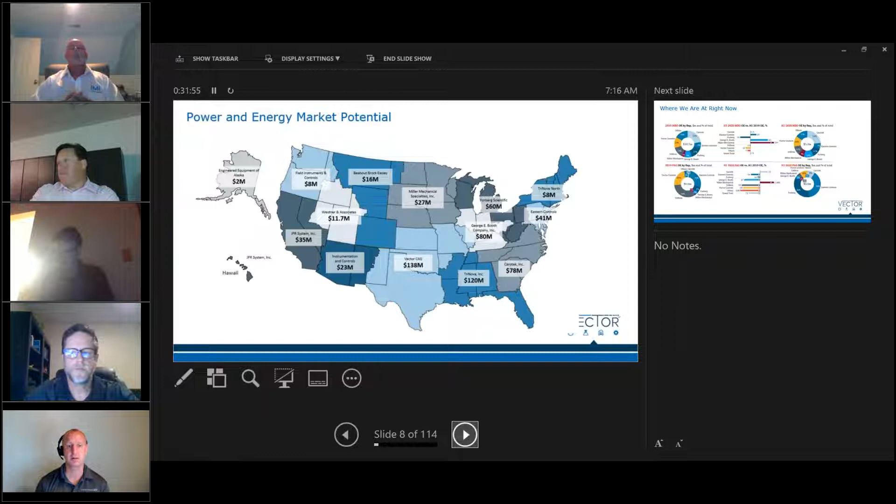Boyd, yeah, the question came up that your slide here is just showing power and energy markets, right? Yes, this is only power and energy and only instrumentation. Yep. Thank you. Yep.

And then if you look at how we've been performing this year: if you look at 2020, our MRO business overall in the US has actually slightly grown. We're up 3% in MRO, which is pretty impressive right now, given the current state of the economy and everything. So there is opportunity there. We still are winning MRO business, and that's kind of the hot hand right now in Endress+Hauser, one of the hot hands.

If you look at the project business, even though all of these gas turbine plants are still going on, we're actually kind of in a lull. We're bidding a lot right now, and in the beginning of 2021, those orders are going to start coming through just because of the construction cycle. And the industrial steam kind of follows industrial output, so that part of the project business is down this year. That's leading to being 70% down in projects this year.

So that's really where we struggle. There's plenty of opportunity there, especially on the generation side, probably more so than the industrial steam. The other reason this is down is because the turnarounds have really taken a hit. There's been a lot of delayed maintenance and delayed turnarounds. So we're looking at 2021 as being a really big turnaround year. That's one thing to focus on next year: when we talk to utilities, look at their turnaround schedule. They're going to be doing a lot of maintenance and need a lot of work. So there's going to be a lot of service opportunity out there in second half 2020 and 2021.

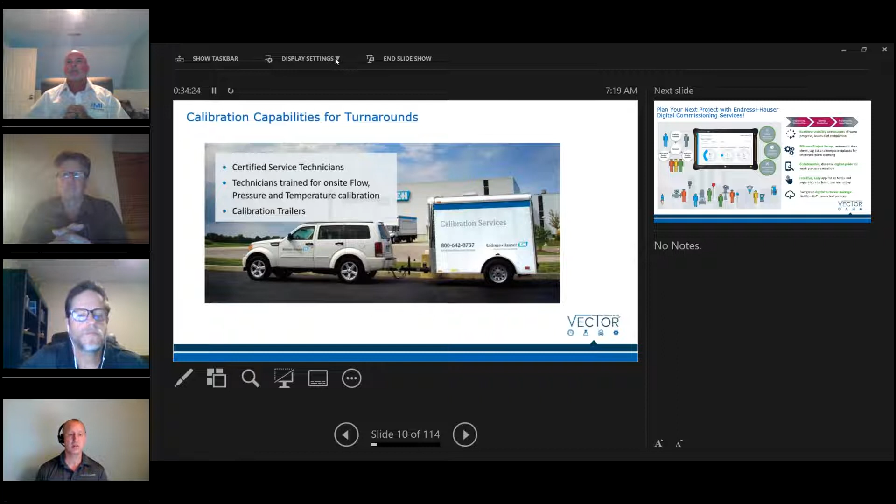Also our calibration trailers, especially with flow. If you look at the natural gas flow into the turbine, for instance, that's one thing they have to do a lot during turnarounds. Being able to help with that and do a flow calibration on site really makes that calibration go quicker.

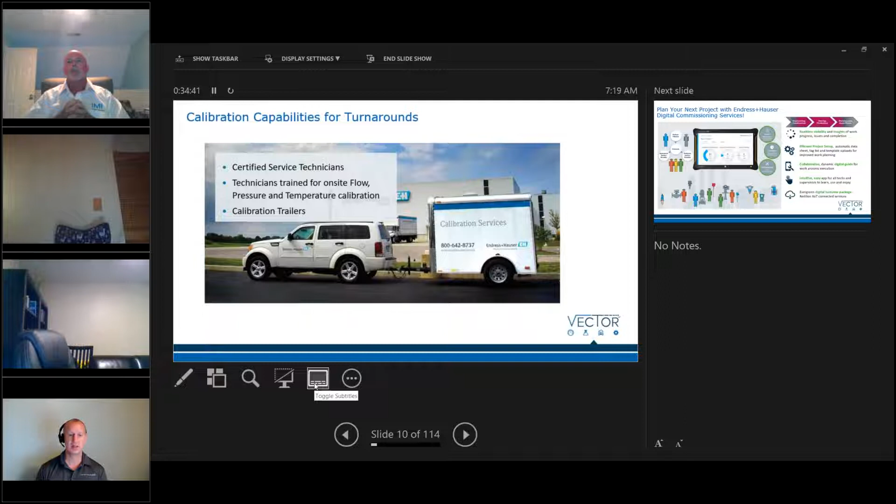Go on the next slide. Looks like we're in the middle of technical difficulties. Maybe, should I keep going? All right, I'm gonna keep going. Hopefully you guys can hear me.

I think most of you are familiar with our SMT-70. This does a couple of great things for our end users as we talk to EPCs and NG plant operators and utility operators. What they lack right now a lot of times is a single place where they can go look at all their instrumentation, with all the DTMs and drivers in one machine.

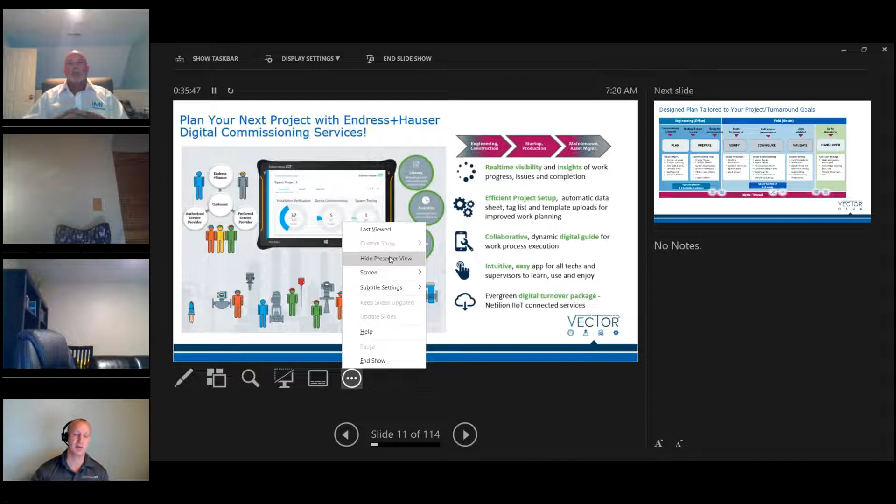A lot of utilities and power generation stations are still doing their calibration with pencil and paper. They'll send an army of people out there to calibrate, do it all by pencil and paper, go back in, and upload that to a computer.

So this leads to a couple of problems. Number one, there's transcription errors as they write it down and then transcribe it over to computers, tracking systems, and into their EPC or maintenance tracking system. It takes a while, and there's a lot of opportunity for error there.

And it's also hard for them to track where they are on the outage schedule. So they don't have that real-time update. They have like an end-of-day update, or maybe even every couple of days, an update of exactly where they are.

So that's one thing that the SMT-70 install base audits can really help them out with, along with the increased manpower of having people come in and do calibrations, because often they don't have the manpower to do that. That's one place Vector and Endress+Hauser can help.

Can we ask Boyd a question while you're waiting? Bring it. Yes, please.

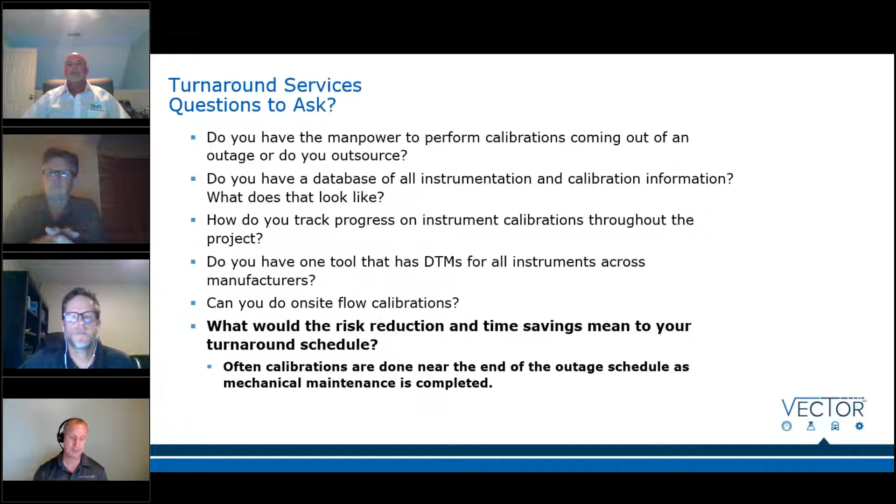So that's something that really helps end users, especially coming up next year where there's going to be such a heavy turnaround schedule. This is something that could really help people out. And really what the people we've talked to are interested in is being able to come in with turnaround schedule help. So bring in an SMT70, put in an installed base audit, do all the instrumentation, and then at the end of that outage, we turn over the SMT70 with all of that inside the machine. So that helps them not only with the current outage, but with all outages going forward and gives them a better instrumentation calibration schedule or program. So really big for customers.

The other thing to look at is heartbeat verification. Of course, we're the only people in the industry that can do this. As we all know, there are 3 pillars to heartbeat: diagnostics, verification, and monitoring. I'll focus on verification for today. The good thing about our verification, or where this helps our end users, is with a couple of very important calibrations. Think of the flow calibration for natural gas going into a turbine and the flow calibration for the stack that are both needed for regulatory purposes. If you look at natural gas flow in, if they have to take that flow out of the system, put it on a flow skid and calibrate it, I think they're moving to every 6 months. The EPA wants them to do that. So if you can extend that through heartbeat verification, that's a huge win.

It keeps their plant up and running longer. They don't have to bring it down just to do that, or sometimes they have multiple strings. But even if they have multiple parallel instrumentation, that's a big point of leakage. So the less times you can break that seal, the less times you go through the mess of bringing that out of the system.

That's a huge win for them, and that's something people are very keen on doing. So if they can go with a heartbeat verification for one of the cycles and extend that to a year rather than every 6 months, that's a big win for our end users. And that's something, like I said, only we can do. That's a highly differentiated solution.

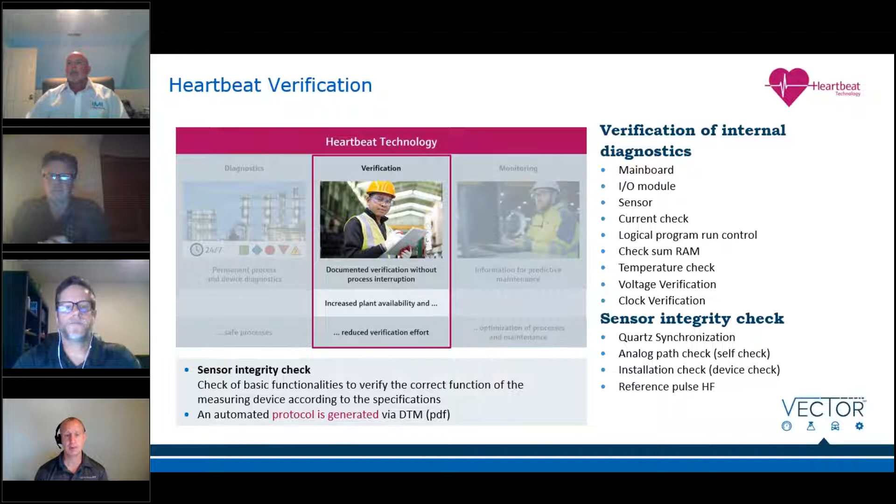All right, so pretty easy questions there. If you just get them talking about the process of calibrating the inlet fuel flow to their gas turbine or their boiler, anything they can do to extend that calibration cycle is going to be a big win for them. That's money directly in their pocket.

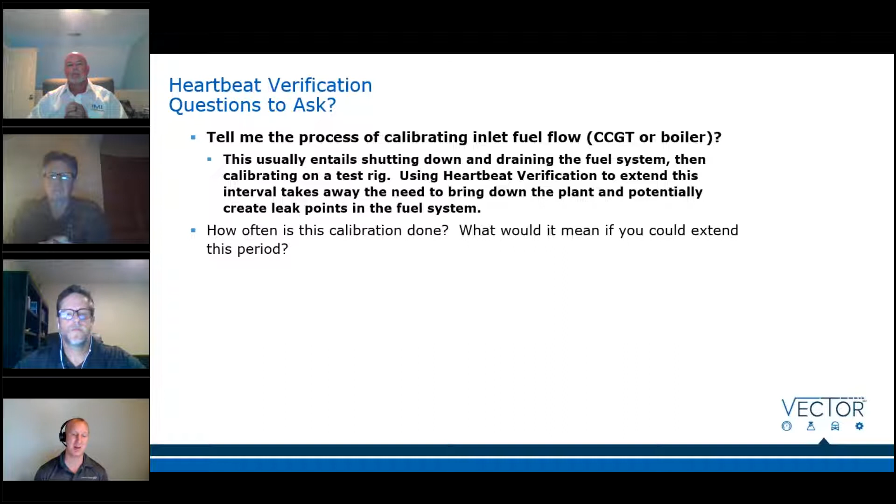But then if you talk about how the calibration is done, what would it mean if you could extend that period? Those are the big talking points—what if you could leave it in there and do a heartbeat verification instead of a full calibration, bringing it out and extending that cycle.

All right, so the next one to talk about is gas phase compensation in the steam cycle and level measurement on the pressure vessels. If you look at the big places for this in the steam cycle—the boiler drums, the high pressure heater string, and the feed water tank—we'll just kind of focus on the boiler drums.

The traditional way to do this is through DP. I talked to a lot of utilities, especially combined cycle plants that were built with DP level control. The problem is if your level goes too high, you'll end up getting vapor down your main steam line. You get it into your turbine, which leads to really bad things—as you can imagine, those steam droplets hitting a turbine rotating at 10,000 RPM.

If you go too low, then you can uncover steam tubes. If you uncover steam tubes, then you have real problems in your boiler—either your boiler or your feed water heaters inside of your HRSG, your heat recovery steam generator.

The problem is a lot of people don't know whether they have a wet leg or dry leg in your DP cell. If you don't refill your wet leg as you come up to pressure, you'll basically have flashing of that steam leg. Your level indication will become erratic, and you'll have automatic plant trips, or it's just a scary situation—just not being able to see what your steam drum level is as you come up. That's something a lot of end users have problems with.

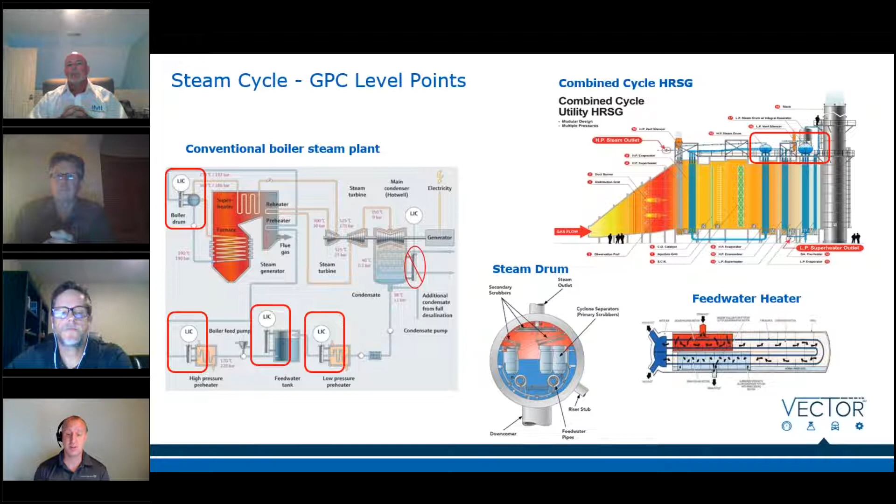However, if you go to the next slide, that does introduce a new problem: radar speed is changed by the density of the steam. So if you have dynamic gas phase compensation, you can actually compensate for that. You have a reference rod within the transmitter or detector, which will detect that known length. It'll see how long it takes the radar to travel that distance, and it'll automatically compensate the level for that.

The problem is you really have issues at startup and shutdown. As you move through that steam table, going from atmospheric pressure up to 2,000 or 3,000 psi, that is constantly changing. So what you need is dynamic gas phase compensation—during startup and shutdown is when you have problems. So it gets rid of all the problems with DP cell or DP level, and it gets rid of the problems with static gas phase compensation.

Normally what people do is wrap this all up into one bridle that's got a magnetic level indicator with gas phase compensation. Anywhere you have a sight glass, you'll be able to have flippers, so you can easily see what the level is visually. You have an independent way to see both remotely and locally what the level is, meeting all the ASME guidelines for your gas phase or level compensation on your pressure vessels, which is big.

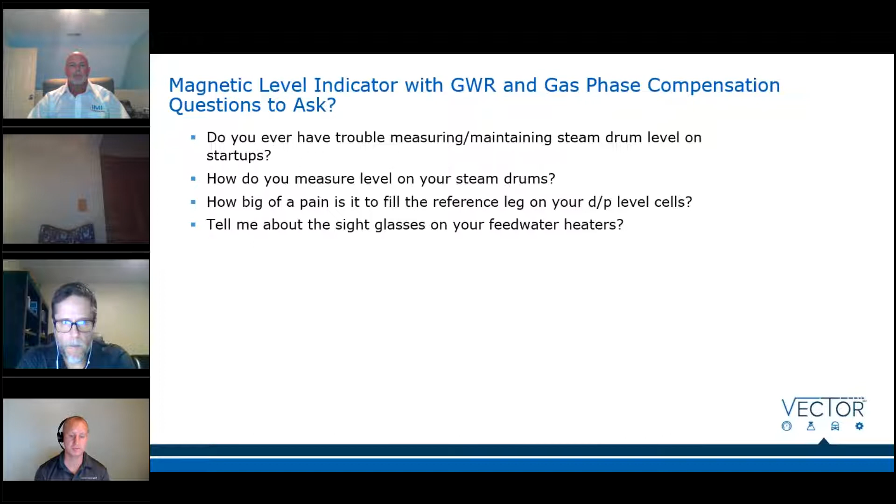And then of course the sight glasses—once the sight glass gets old, you can't see through it after the first year and a half. You get a bunch of crud buildup in there, and the magnetic level indicator solves that problem for them.

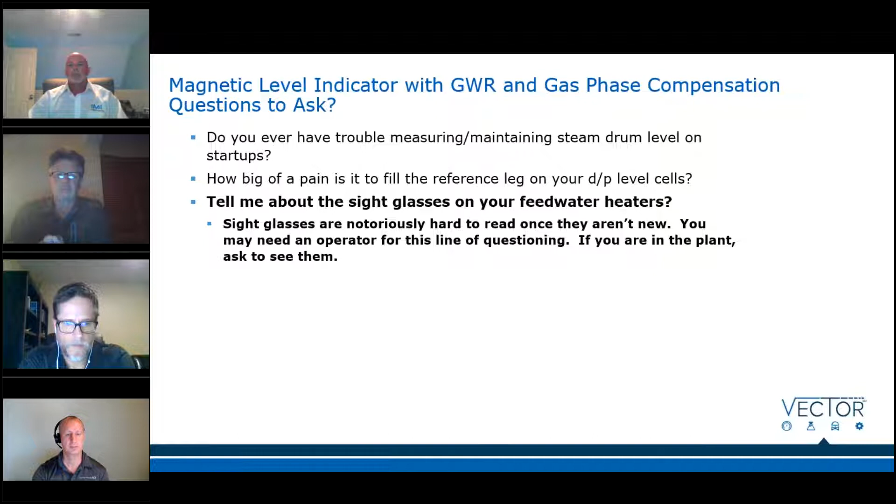So the next thing to talk about is fuel flow to the boiler or gas turbine. Depending on what type of boiler or turbine we have, of course, a full array of flow measurement going into that. We talked about heartbeat technology and why that's important to this measurement.

The other thing to talk about is onboard gas engines, which is really big if you're running a turbine or a boiler, especially if you're using some sort of flex fuel where the combination of gases within that are changing.

If you're running natural gas, Coriolis is a really great measurement for that. If you're running a boiler, you might be using something as low as the i300 series, or something a lot bigger if you're running a full-blown gas turbine, like that 500 megawatt turbine. But being able to have an inline viscosity measurement, Coriolis flow, and detecting water in the oil, and of course integrated gas engine, which we'll get to in a second, are really big there.

If you're running a boiler and, of course, biogas for instance, being able to use the Prosonic flow and getting real-time methane fraction analysis is really big—that way they know how much methane is present. Then the thermal mass flow meter for either smaller boilers is a big one too.

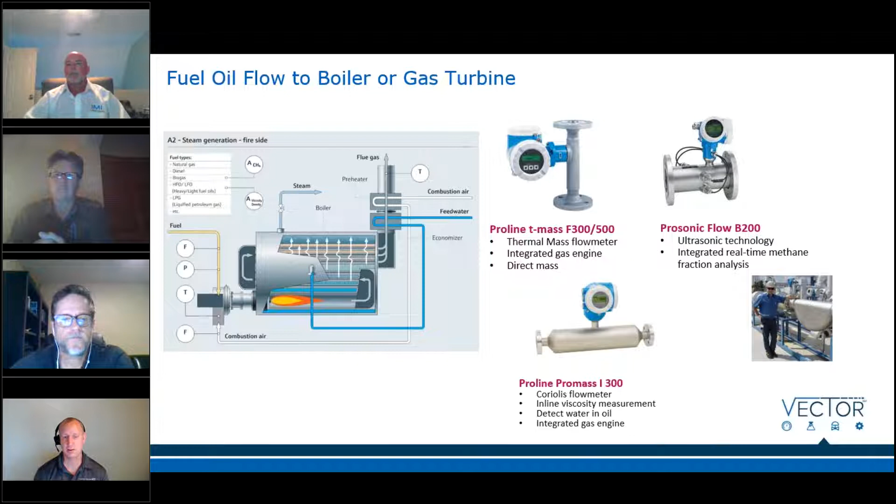Of course, onboard gas engines allow you to load in what the mixture is of your gas, and there are 20 gases available. So when we say natural gas, that's actually a mix of all sorts of gases. If you know all those gases, you put them into the standard gas engine, and it'll spit out the gas conditions. It'll look at what the densities are and adjust for that, giving you an accurate measurement of all the gas mixtures, the BTU content, and better control of your boiler or gas turbine engine.

It's also a good way to back up what you're being charged by whoever you're buying the gas from. A lot of people are using that to check their bill and make sure they're getting what they're paying for.

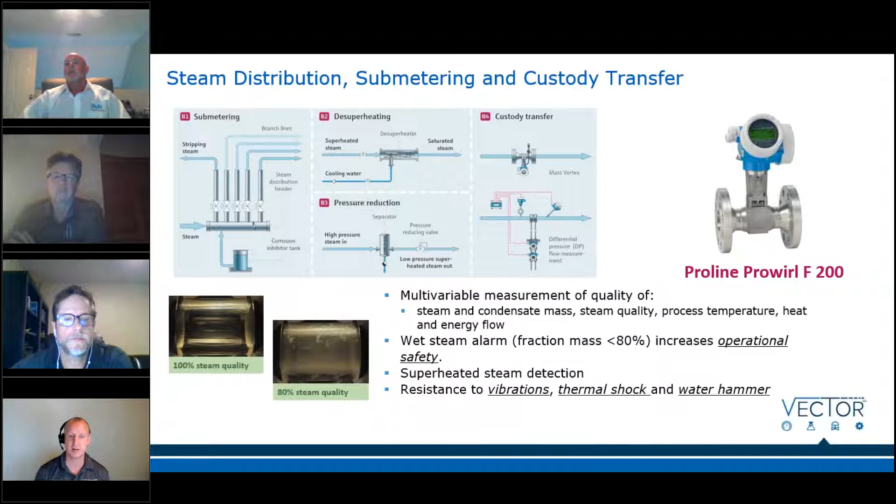It'll let you know if you're actually having enough cooling water to get your superheated steam down to saturated steam conditions. So it can measure how much subcooling you have, and how much superheating you have. In some places in the plant you don't want superheated steam, so it can give you an alarm to make sure your desuperheater is operating correctly, and let you know if you have superheated steam where you don't want it.

So both of these put together: if you have a better way to measure the BTUs in your fuel, and a better way to measure the steam quality and energy of your steam, you put those together, throw in a memograph advanced data manager, and you can do a much better job of measuring the boiler efficiency.

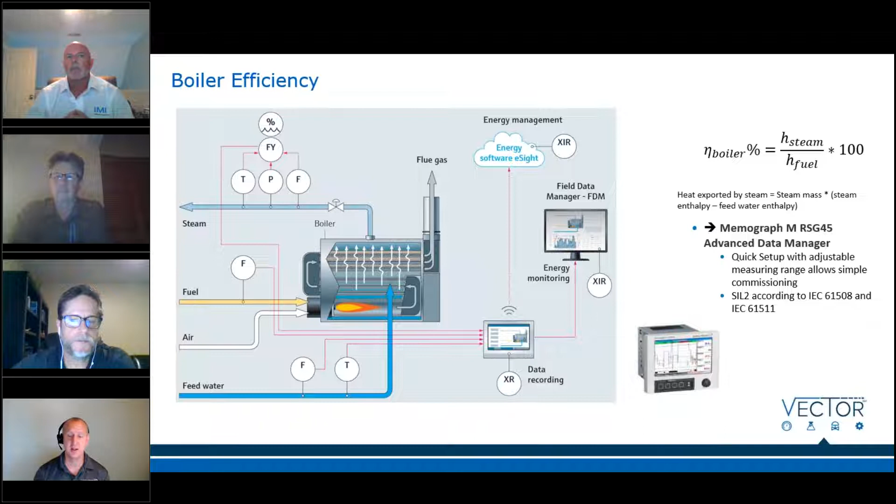Of your steam plant, either boiler efficiency, or you can actually measure the efficiency of any of your plant equipment. If you've got heat exchangers, anything you want that you've been doing a mass balance on, you can now do an energy balance on, so you can know how efficient your equipment is operating.

You can better plan your outage schedules. You know when to clean heat exchangers, when to bring them offline, when to go to standby, when to backflush. You can just have more insight into how your plant's operating. Really, the enabler for that is the wet steam measurement and the fuel flow measurement.

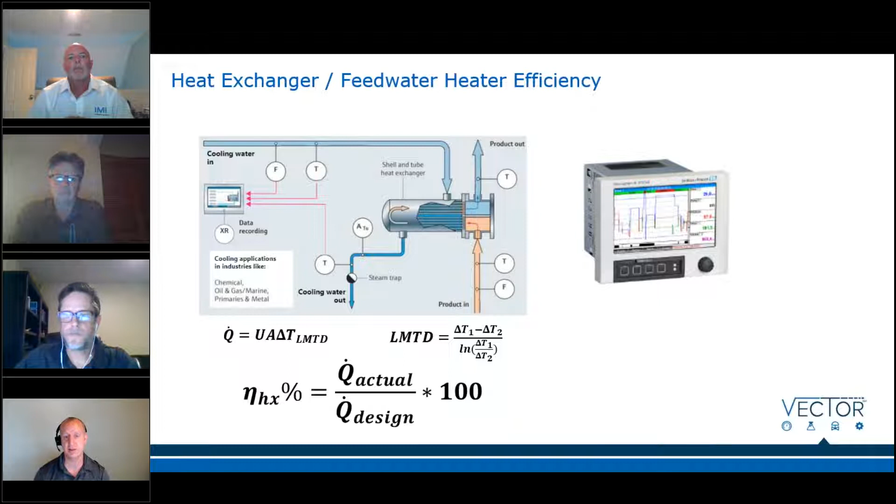So questions to ask: when you look at the components of your natural gas, especially if you have a plant that's dual fuel, using diesel fuel or natural gas or biogas, how do you switch off? How do you know what the fuel composition is going to your boiler, and how do you know what the efficiency of your boiler is?

Same thing with a heat exchanger and feed water heaters. How do you decide when to clean a heat exchanger, when to do maintenance on it? When you come into an outage with all this thermal equipment in your plant, how do you decide what maintenance to do on what? This can really give insight on when to do that. And of course, how do you know when your steam quality is too low?

This is a big problem, not so much in generation, but especially in industrial boilers. Knowing when your steam quality drops is a big deal in cogen plants too, because people just assume it's 100% vapor, but it's almost never 100%. As soon as it leaves the boiler, it starts condensing as it goes down the pipe. So knowing the actual vapor fraction is a big deal.

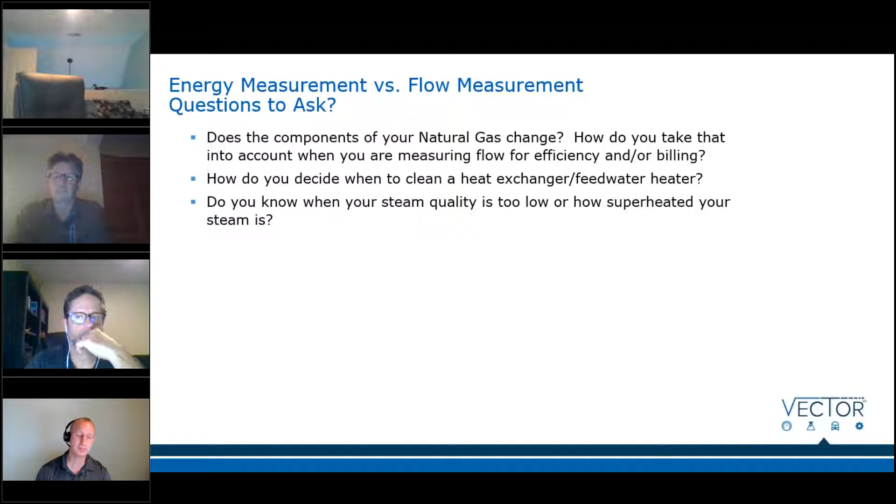I think we covered all this. The last one here is ProMag, one of our newest products that came out, the full bore ProMag electromagnetic fuel flow meter.

Sorry, just got a pop up there. You guys can still hear me, right?

Full bore fuel flow is a big one, especially as a lot of plants are upgrading, going from coal plants to gas turbine plants, with a lot of overhauls and work being done inside power plants right now. One thing people are looking for is upgrading instrumentation in general, and flow is a really hard one. If you're looking at feed flow, or flow to your main condenser or condensate system, being able to put in a new mag meter without worrying about straight run piping is really big. That allows them to upgrade their instrumentation and technology without having to re-engineer all of their pipes within the system.

That's pretty easy, just a conversation about where they're looking at upgrading their plant. I think you guys know what mag meters are and straight run piping, so I don't think that needs much more explanation.

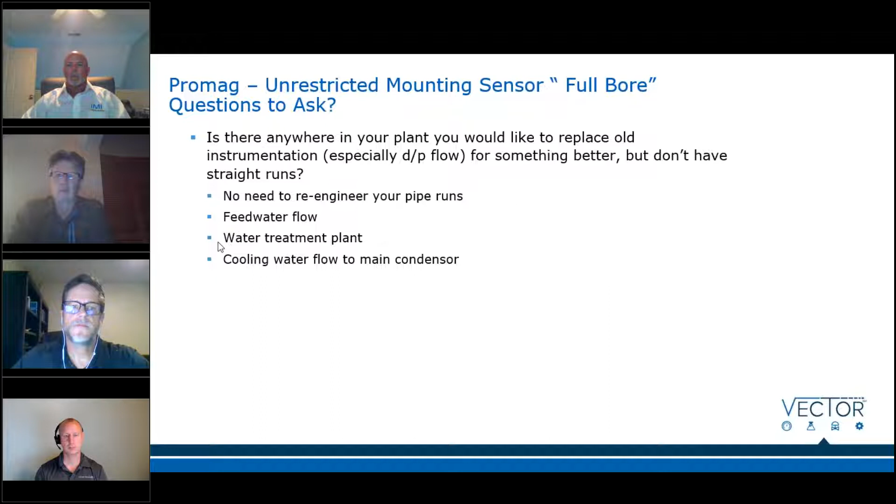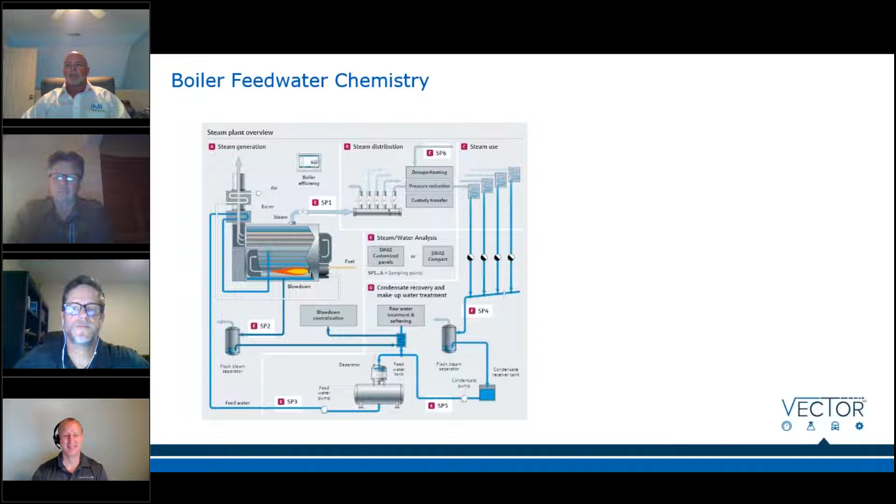Wait, sorry, Nick, we may need you again. Oh there we go, don't touch anything else. All right Boyd, back to you buddy. Are we in the right spot or do we need advancement? No, we're good, actually advance one more.

There we go. So if you look at all of the sample stream, we have a very robust analytical portfolio. Unfortunately, we don't do a ton of business in analytical. I'm not sure why, we have everything that our end users need for their feed water chemistry. I think it's mostly honestly an effort thing, we haven't tried to sell analytical that much.

But a good time to get in there right now is with our silica analyzer. It's really better than the competition, quite honestly. That's where we have good talking points and where we can actually win business. So I think the right way to do that is lead with silica, and sodium to a lesser degree, but silica, and then try to dovetail everything behind that.

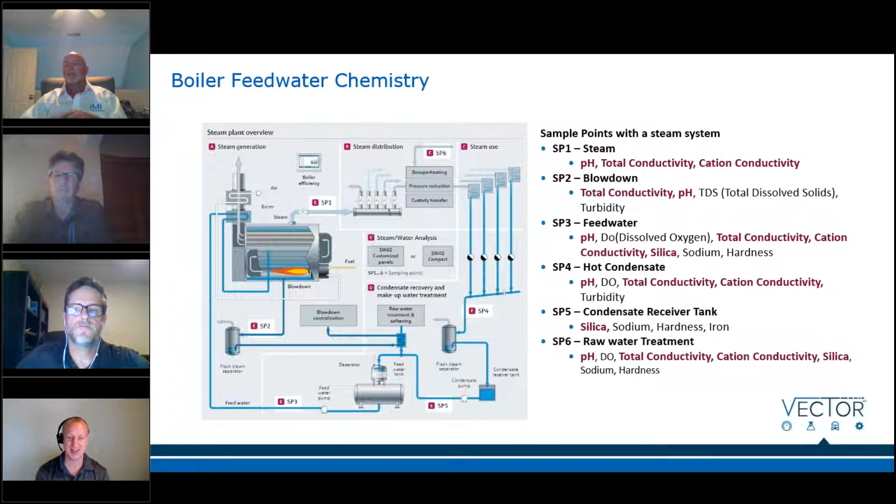The other thing we have is the MemoSense technology. I'm not going to give you the whole analytical rundown, mostly because I'm not an expert on it, and because I think you guys have probably looked at our analytical already and don't need that baseline of knowledge right now. We can definitely get into that at a later date, obviously. But if you go to the next one...

For MemoSense technology, of course, we have pH, ORP, conductivity, dissolved oxygen. Really, the big ones in the power industry are pH and conductivity. That's used in a lot of places. Having the MemoSense technology, with the brain staying with the actual sensor, being able to flip that out and do calibrations without taking it out of the process—all of that is a huge step over what people are doing, and having that real-time measurement.

The other one I want to focus on, since I don't have much time left, is silica. Silica is a real big problem in power plants. It gets introduced to the plant through the water treatment. When your ion exchange resins break down, it'll either get through the groundwater used as makeup water for your steam system, or it'll actually breakthrough and get released from those ion beds. The problem with silica is it stays in when it's in steam and it's hot.

It actually stays in the steam, but when it starts to cool down, it'll plate out on material. The two places it generally plates out is on your steam turbine blades. If you can imagine getting a buildup on that steam turbine blading, it leads to imbalances and a lot of inefficiencies.

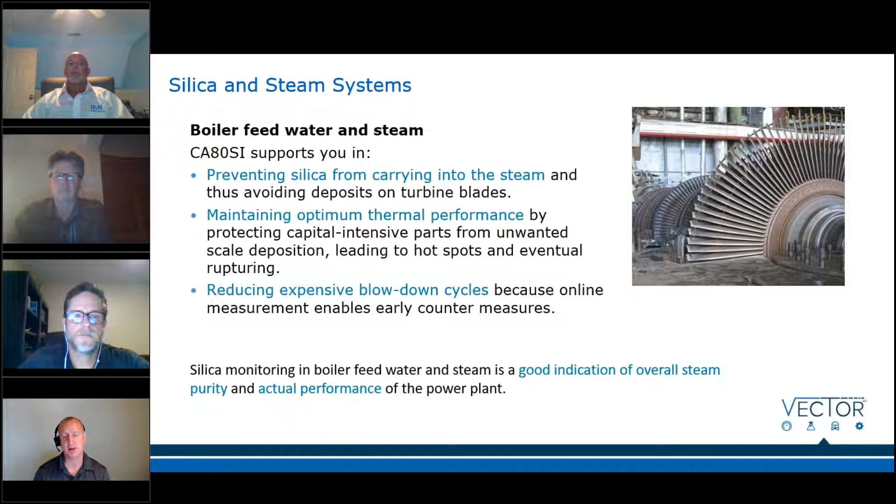The other place it'll plate out is on your heat exchanger. As it cools down on your feed water heaters and such, you'll get that plating, and it's almost like silica sand—that's what you make glass out of. You almost get a glass coating, so all of your heat exchanger surfaces are going to be really compromised.

Our Liquiline silica analyzer is actually much better than the competitors. The two things to talk about here are the dispenser pumps. There's basically two places to dispense. You have the hydrostatic pump, and what a lot of our competitors do is use that with a timer—pressure builds, a timer triggers, a valve opens, then shuts. The problem is this isn't a very accurate pump, so that timing uses too much or too little of the chemicals too often.

What we have is the hydrostatic pump actually making the pressure, and then you have what we call precision dosage—individual linear drives. Basically it's a syringe, so that syringe is very accurate in dosing. It does a couple things: it gives you more accurate measurement, and it loses a lot less chemical over time.

The other thing is the physical layout. Some of our competitors actually have this pump mounted right next to the electronic circuit board, which, if you can imagine, having water in the same place as your circuit board isn't the best of ideas.

Some of our competitors are forcing end users into long, drawn-out service packages that they don't necessarily want to pay for, or they're voiding the warranty if your instrumentation breaks—it gets voided unless they go into long service packages. So there's a lot of opportunity right now, both from the way our competitors are acting and the design of the silica analyzer. It's pretty highly differentiated right now, and people are open to making that change.

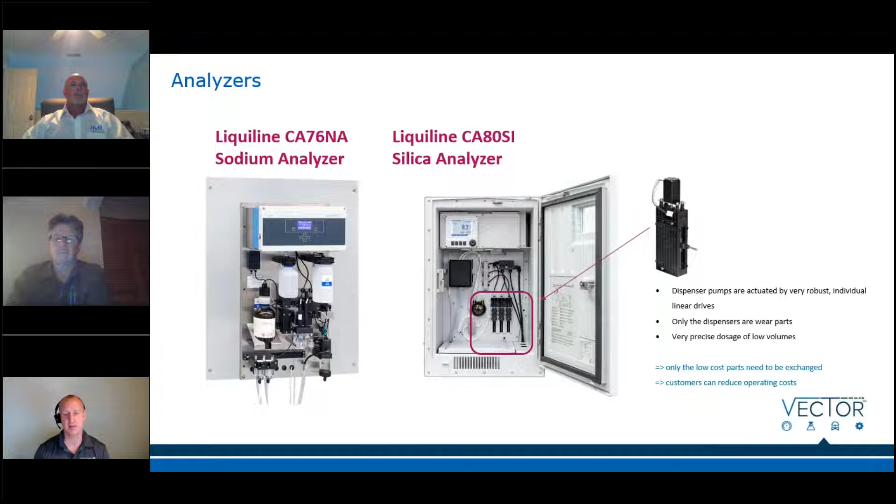Honestly, I think the one advantage Hach still has is basically relationships. I don't think they have an advantage anymore as far as equipment, service, or how responsive they are, but they do have a lot of relationships.

For the first time, we will be having a booth at PowerGen in 2021. It was supposed to be 2020, but it's being pushed back to I think March or April. So we will have a booth there, it's going to be in Orlando, so not too far from your neck of the woods. So anybody who wants to come by and see PowerGen and help us out there in the booth, that'd be great.

No, it's not approved. Who was that? Dan Abaird. Don't listen to Larry. All right, Dan, I'll definitely keep you in the loop.

Thank you. Another thing we have right now is we're actually making pretty big strides with Kiewit Power, Gemma, and Black & Veatch. We haven't done any business with Gemma Power, I'll tell a quick story there in whatever little time I don't have left. We haven't bid a project for them in like 10 years, and now they're actually coming back. We bid a project recently, and we've got 2 more on the horizon with them.

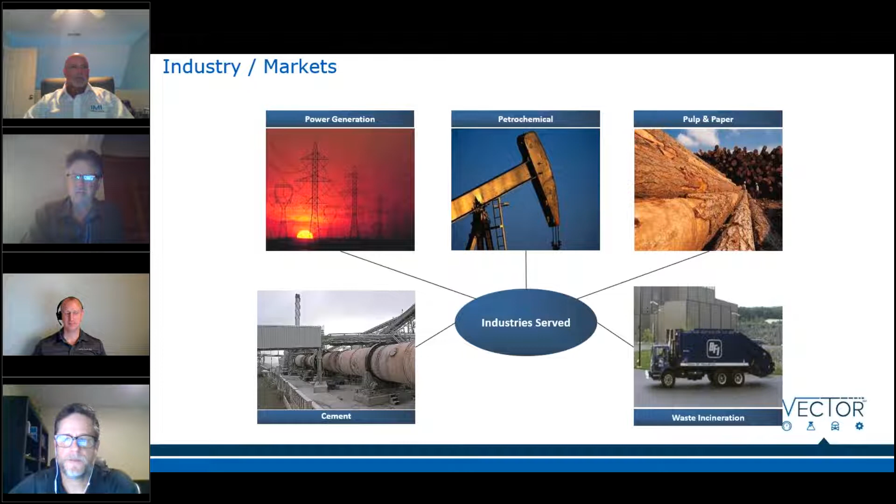So who's changing the slides, me or you? If you can, you're more than welcome to. If you struggle with it, when you pause, I'm gonna jump ahead. Well, try one. I'll do like this, go like this or something and change the slides. Just want to make mention on that last slide.

I'm with Thermo Scientific, with their analytical division, and we're manufacturers of gas analyzers and analyzer systems, generally for EPA compliance, for air quality. So we're talking smokestack emissions, but we'll also talk about process measurements made along the way, particularly with pollution control equipment and combustion control systems still used in some of our older technology.

We didn't talk a lot about coal-fired power plants, but Thermo's still big in the remaining ones we have out there. This slide is an example of some of the instrumentation we make. Our factory's in Boston, Massachusetts, and we've been around since about 1974, since the EPA first started making regulations associated with air quality.

Our business started with a couple of Greek guys who built analyzers in their garage for Ford Motor Company, doing tailpipe emissions. The entire company now has been built basically on the back of our gas analyzers. Thermo right now is about $25 billion a year, but most of that is life science companies, pharma, biopharma, and solving the coronavirus.

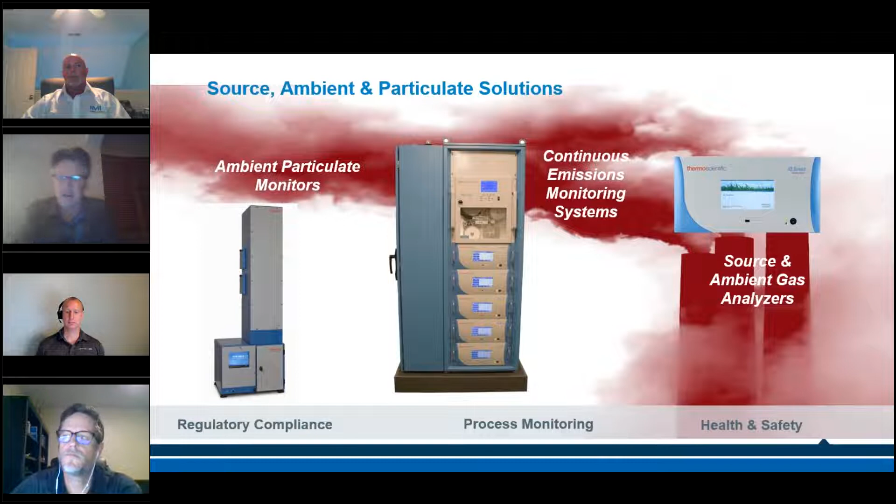Let's see, can you advance a slide for me there? Yeah, I thought you could for a second. That's why I was leaving you alone, but okay, I got you. Yeah, I didn't know how to do it. I was hitting the arrows there, but that wasn't doing it, and I didn't see anything to click on. So if you, I'd appreciate it.

One of our flagship products is a mercury monitor, a system that measures mercury. And I said I had a place in my heart for the coal-fired industry. This is strictly for coal-fired applications, both cement and power, but there's a lot more power plants in the country than cement. I like coal.

I've been in the coal business since 1958, the year I was born. I remember driving to my grandparents' house and smelling the old coal-fired boiler that heated their house, and I've been in love with coal ever since. So Thermo has made its living on the backs of dirty industry, but the transition's being made more and more toward gas-fired stuff because we know that's the future.

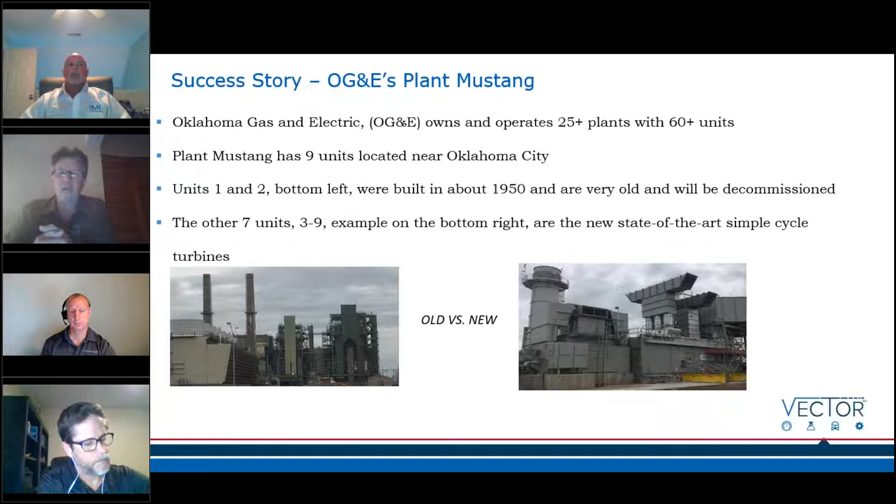Next slide, please. Side by side with one of our competitors, and I won't say their name, but it was Teledyne. Next slide, please.

And so we were put head to head with them and went through all the subsequent testing and so on and so forth. The Thermo instrument was the clear winner, and was able to deal with certain startup and shutdown conditions that stumped the other guy's instrument.

So the whole thing boils down to, and this is what the EPA really cares about, that relative accuracy number, and that's the comparison between the installed equipment and the stack tester, which is the independent third-party verifier. They come out and run side by side with our system, and we do a relative accuracy test. Well, that 3.9% relative accuracy is huge.

Many times you're up 15, even 20%. In this case, the competitor was over the 20% limit because the converter inside their analyzer was not able to handle the high levels or the high ratios of NO to NO2. So we can talk some chemistry here if you like, but there are some nuances in gas turbines that make them different than coal-fired power plants in relation to some of the measurements.

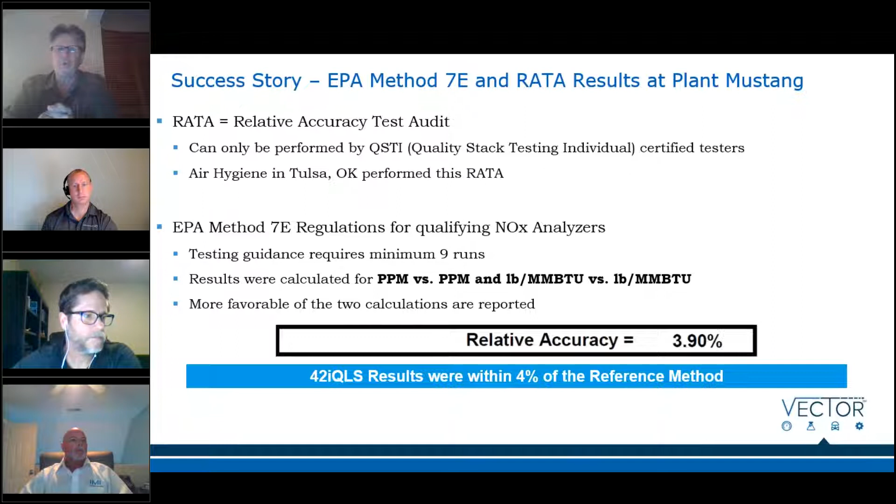Let's suffice to say that this was a real success story for us, and a story we can tell our other gas turbine customers, especially customers that have a blend of both new and old turbines. I think it's a great story to tell. Most of our customers have trouble with this relative accuracy testing. It's a mandated yearly testing, and most of those end users are more than willing to hear what we have to say about that.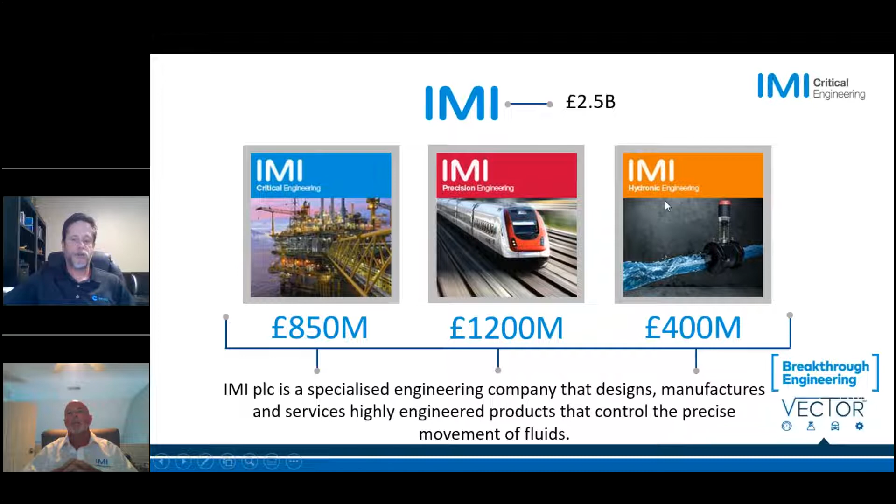So with that, I'm going to go ahead and move on. Real quick, we've only got a couple slides on this, but since this is a new partnership — if you see here, my shirt still says IMI CCI. I started out in the CCI world, which I'll get to in a slide or two, but IMI as a whole is basically three divisions, and where we come from is the IMI critical division of the three: there's critical, precision, and hydronic. Just to break it down a little bit further...

Underneath that master brand and then our divisional brand, critical engineering, we work, as Dan said, in many industries, and we have a lot of brands underneath IMI critical. Like I said, I come from the CCI background, but we have all of these other brands that we have purchased over the years. So you'll see a lot of different IMI-something brands afterwards that represent many of the products we'll be out trying to work with you guys on. Any comments, Dan?

Good, okay. Nope, so you got it. I'll skip this one because we've already mentioned it.

We work in pretty much every industry, and I'm just going to jump right into it, because what I want to do is talk a little bit at the beginning about CCI's philosophy for designing control valves. So there's going to be a little bit of fundamentals here on how we look at how a good valve design works. It's going to be a little different than what Boyd and Jeff did, but I've got to point out some things they said that were great.

Every customer and every plant they mentioned, I was like, check, check, check, check. We've got product in those. OG&E, tons of their plants. All of the EPCs that were shown, we've worked with all of them. So it's pretty interesting. And what Boyd even said about the state of the industry and the way combined cycles have transitioned over the years, I was shaking my head if anybody could see me. Yes, yes, yes. Everything they were saying completely aligns with what we're seeing happening, and it's very relative to control valves.

So with that, let me kind of get into it a little bit. What I'm going to do is explain to you, again, CCI's design philosophy.

I was told, and I hope I'm not offending anybody, but I was told that maybe we don't have a strong control valve background in this audience. Is that true, false, maybe? It varies by salesperson. Some of the guys probably have 10, 15 years or more, but some of the guys probably have less than 1 year. So it's widely varying.

Okay, so go ahead and start at the ground floor and build up. Some people will probably be able to present what I'm presenting, and for everyone else, maybe a little bit newer. So I'm going to start off here with something.

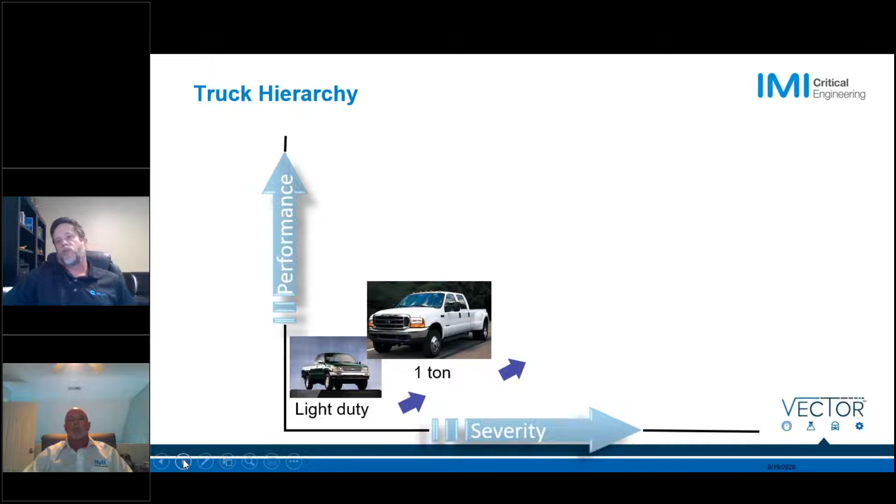I'm glad Jeff led me right into this because he was talking about buying trucks. If you were going to buy a truck and you needed it for a certain purpose, you can look at two things: the performance and the severity. Performance might be how much torque or horsepower it has, but it also has a severity component, meaning it might have some torque, but can it also pull a certain load, something like that.

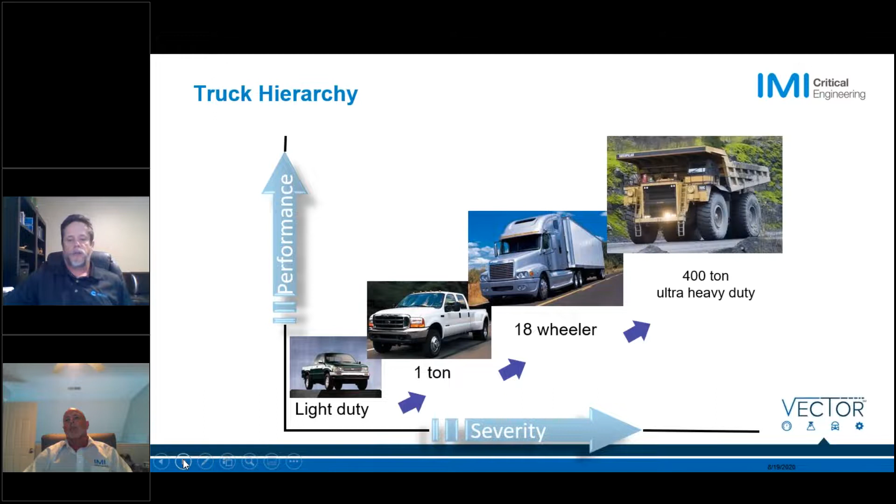So you can see what I call the truck hierarchy. Things get a little more expensive and complicated the higher you go. But there's also the idea of, did you buy the right truck for the right service? If you try to load up a half-ton pickup with too much weight, something like this might happen. But you can destroy a multi-million-dollar truck just as easily if it's not chosen for the right duty.

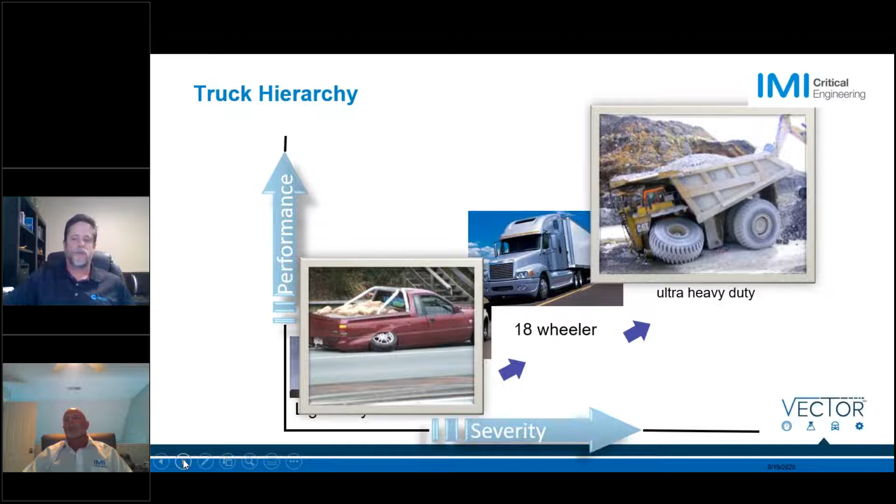Why am I talking about trucks? Valves are very much the same way. In the valve world, there's a hierarchy of valves. Everyone's seen butterflies, balls, what we start calling general service, and maybe not so much for you guys, what we call severe service duty. Same thing: you have performance versus severity. Performance could be the pressure drop it has to control at a certain stroke speed, or there's some particulates in the gas stream that are going to affect the way the valve and trim has to be designed. So as you go further up this hierarchy, you have higher and higher technology.

At IMI Critical Engineering, again I mentioned earlier, it was very small in the slide, we have different brands that supply different levels of performance of valves: IMI Orton, IMI TRUFLO, and then, more of my background and maybe some of Dan's, the IMI CCI. I apologize, I'm going fast.

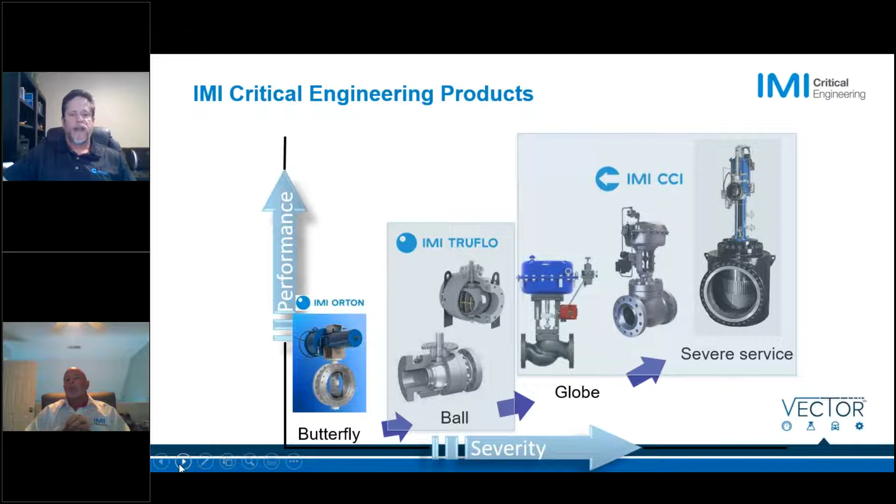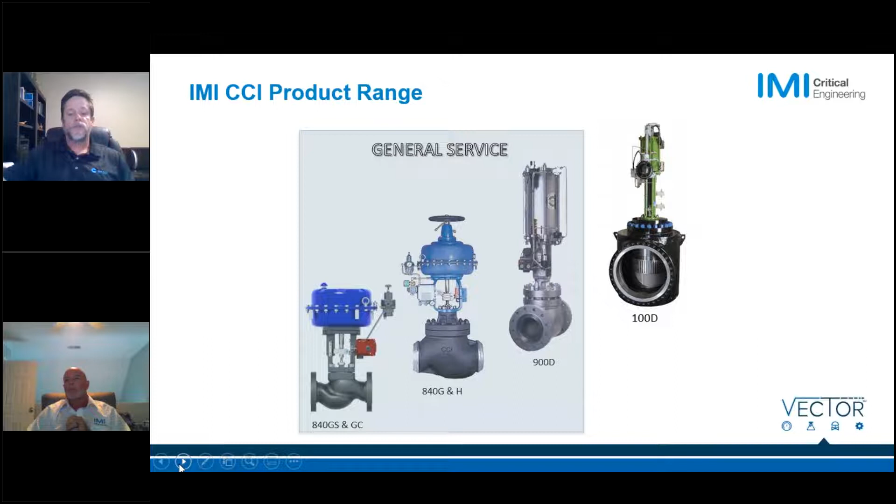These slides are a little bit more introductory. Then within CCI, stepping down even more, we've got what we consider general service valves and severe service valves. What you can consider a general service valve might be a lower pressure water control valve, something operating around 300, 500 PSI, even 1,000 — for us, that's maybe general service. A severe service valve, you could think of something controlling high mass flows with very high delta P's.

Jeff was talking about coal plants earlier. Just yesterday, we were looking at retrofitting a customer's valve at an ultra supercritical coal plant in Turkey that has a pressure drop of 6,000 PSI.

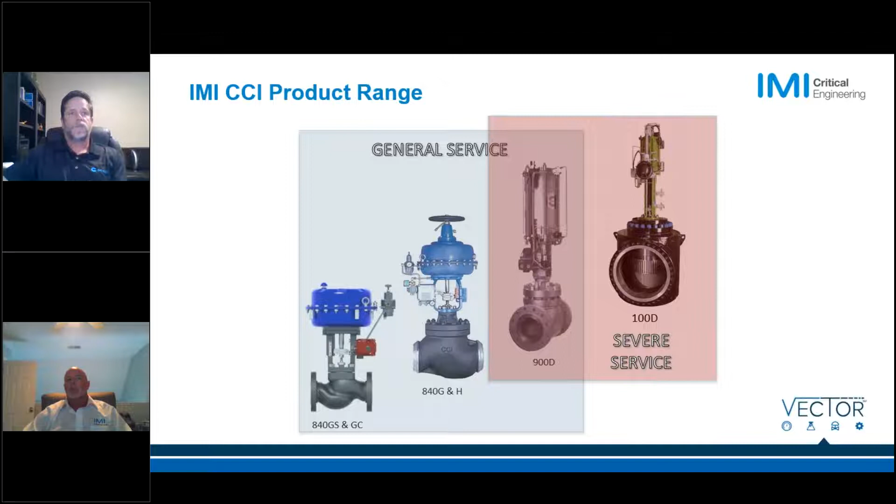So that's a very large pressure drop to try to control a process accurately. With that said, one of the things we spend a lot of time looking at is the valve trim inside the valve that controls the process, either the water, gas, or steam that you're controlling.

CCI has these types of offerings, but now I want to explain to you why, if you don't have enough stages to let down pressure in a valve, what can happen. So the first one I'm going to show, if you've never seen a severely cavitated valve, this is a great set of pictures of cavitation inside a control valve.

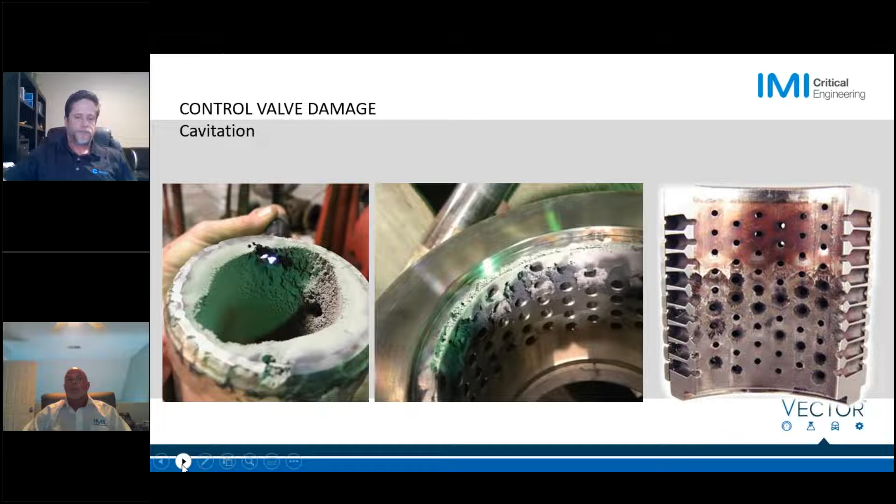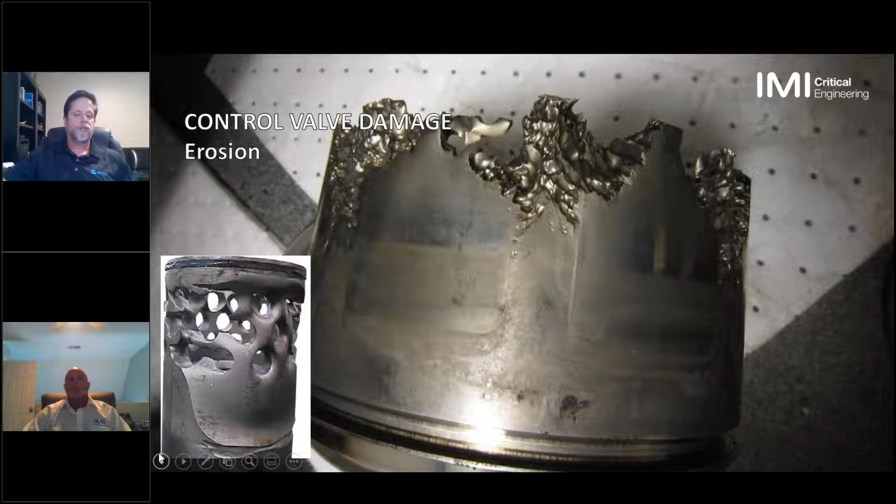Erosion. This is wet steam erosion here on the right-hand side. Look at this one here - it kind of looks like a rat or some kind of varmint chewed up and just ate the metal away. So these are very destructive forces. These are typical severe service failure mechanisms that we see in both the water and steam side. Go through that one quickly.

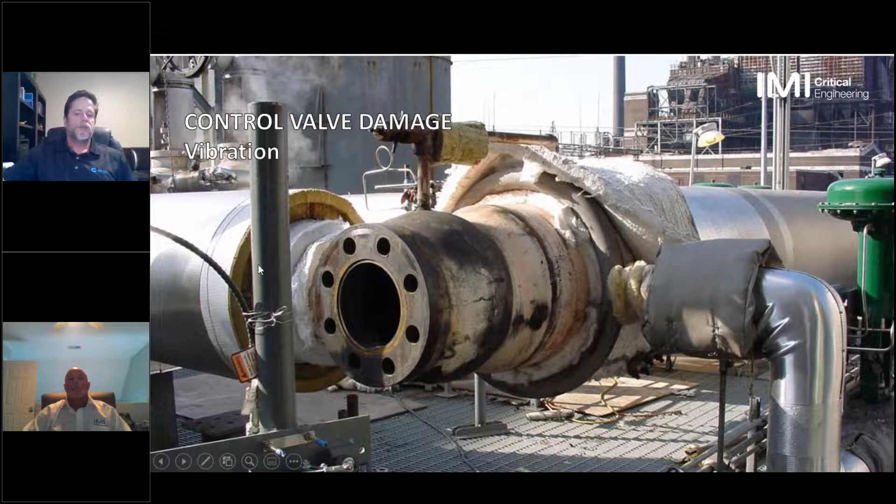This is a very large hot reheat turbine bypass valve. This is a classic example of vibration, caused by not controlling the fluid inside the valve well, and it caused major problems with the actuator mounted off to the right side, which is now decoupled from the valve, such that the valve was stuck and couldn't move. So vibration is another large failure mechanism that we will all be dealing with.

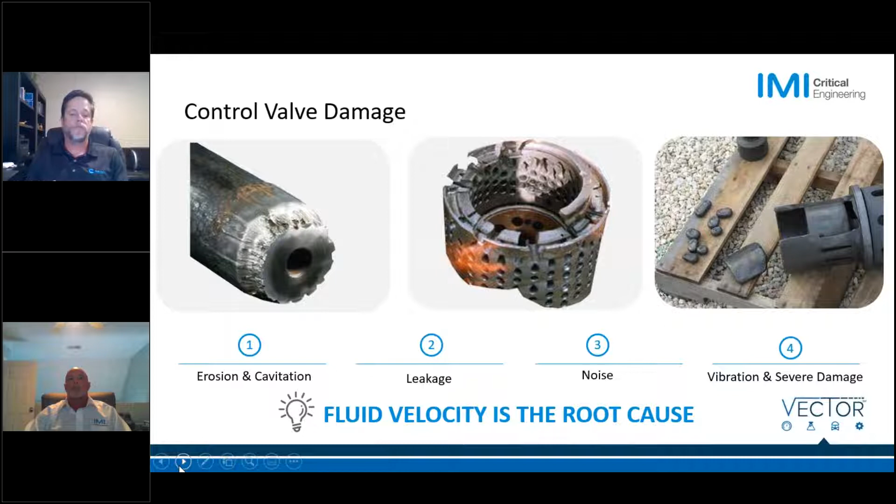So the key to all these things - cavitation, vibration, noise, and flashing too - it's all due to fluid velocity. I mentioned pressure drop a little bit earlier, but I'm going to walk you through a little story now about why velocity is a little bit more important than pressure drop.

So there's some math behind these damaging mechanisms. I'll talk about cavitation and erosion here. If you look at the equations for cavitation, it's actually the amount of material removed in a unit of time related to the 5th and 6th power of velocity. So you can imagine that amount of material removed can get very large very quickly as velocity increases from low to high, because it's a power function. Erosion is the same thing - steam and water are very erosive, and the higher the velocity, the worse things can get.

So what CCI does is we look at controlling the velocity. We're going to take the pressure drop - we know what that has to be, a P in, P out of the valve. But then we're going to look at the velocity that that pressure drop imparts, and that's really what we want to control.

So we like the waterfall analogy. This is, I think, the Canadian side of Niagara Falls.

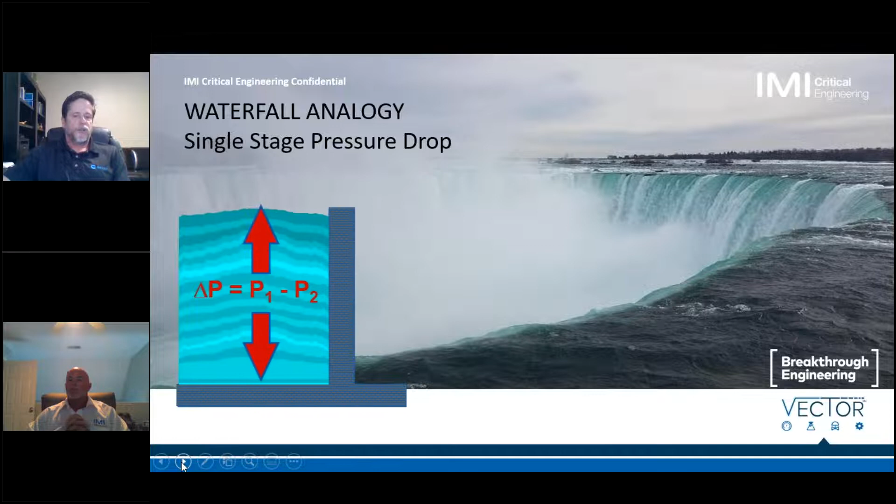If you think about what's happening here, you have a lot of potential energy at the top of the fall, and you're going to have a lot of kinetic energy at the bottom. If you let this fluid fall over the fall in one drop, you're going to have a lot of erosion—there's a big pool at the bottom of the waterfall.

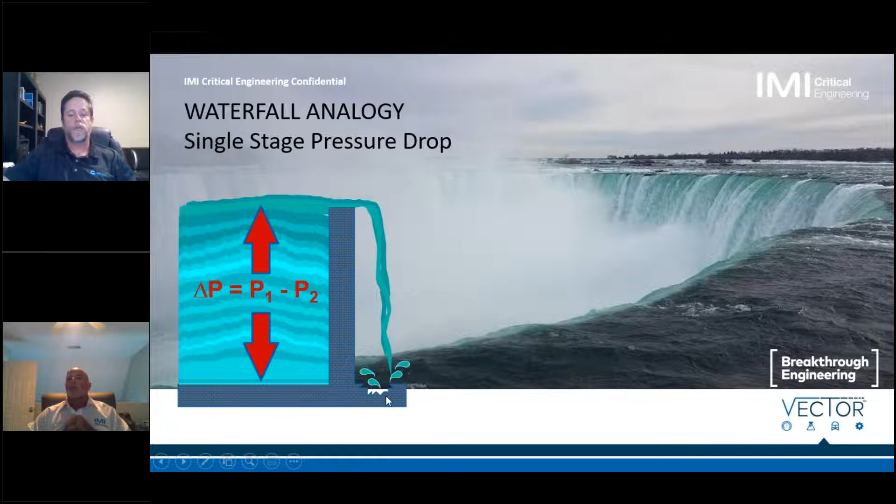So the point here is same P1 and same P2, but I've controlled the velocity. This is the key design philosophy behind a CCI drag valve: controlling the velocity and the energy inside the valve.

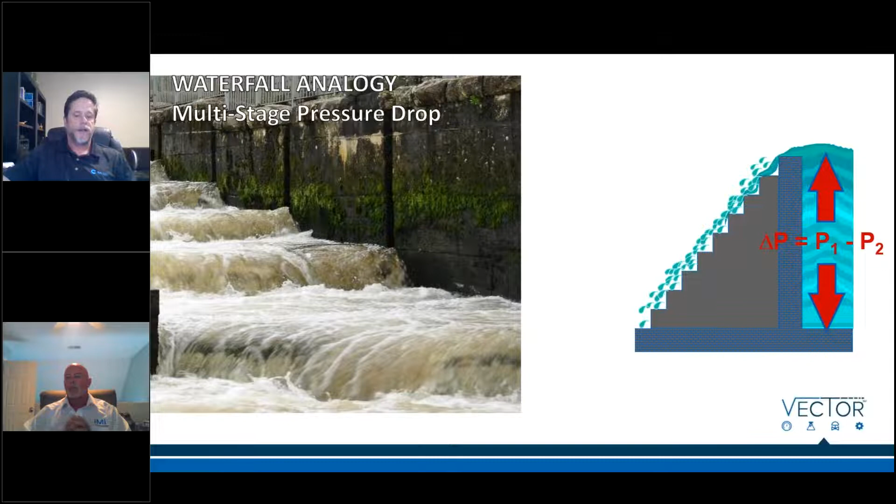Just to put another nice spin on it, I'm going to try to stop this at the right moment. If you look at this waterfall as it's flowing, this is very clear—this is the same waterfall, P1 to P2, P1 to P2.

Look at what's happening over here on the left-hand side—you can clearly see there's a lot more energy. So imagine that's your valve trim. If I have a globe valve or a ball valve controlling P1 and P2, but not the velocity, and I have a CCI drag valve controlling the same P1 and P2, I'm going to be able to mitigate the negative effects of things like erosion and vibration.

Dave, is that IMI's own waterfall, or did you just find that somewhere? Everybody in the room is like, man, that is a great example.

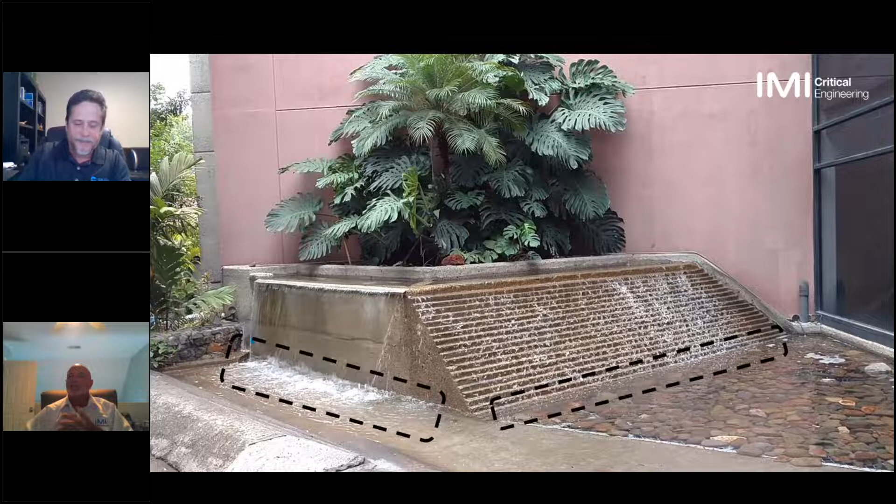So a guy that Dan and I know—one of our salesmen and program manager for CCI, Walter O'Farrell, he's from, oh my gosh, I'm going to forget, Honduras or Guatemala, I don't know if you remember, Dan—he took this at a hotel down in Central America and sent it to me and said, 'I've got the perfect drag slide for you.' So yeah, you found that somewhere, you didn't create that. We did not create it—he just happened to be in a hotel lobby on a trip one time and found it. But I think it illustrates the point pretty well.

So what's a good velocity? I've said velocity needs to be controlled—let's look at some relative numbers here. A drinking fountain is about 3 feet per second. A fire hose might be 70 feet per second—that'll rip the skin off your arms, hopefully not, or peel the paint off your car.

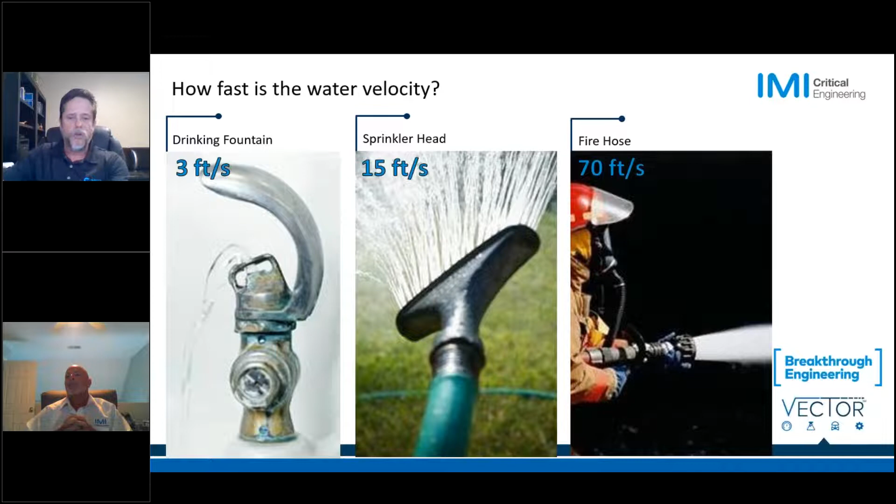Sorry, the slides have a mind of their own. Well, in a control valve, if any of you are familiar with ISA standards, for good control of a non-cavitating fluid, we want to keep the fluid in the trim inside the valve less than 100 feet per second. If you've got cavitating or flashing fluid, we like to slow that down a little bit. In further training we'll get into that more, but there are different levels of velocity control—the general guideline is to stay below about 100 feet per second, which is pretty high.

When you look at gas or steam service, because gas is a compressible fluid with changes in density as there are changes in area, as you go through different flow paths in the valve there will be density changes, which you also have to think of as velocity. So we're controlling velocity, but in a gas we have to think of density—it's easier to think of controlling the dynamic pressure or the kinetic energy. There are many ways to call it, but we're looking at a different type of target—it's not velocity, but dynamic pressure that has a component of velocity. Same fundamental theory though—you have to limit it to some number we've all agreed on.

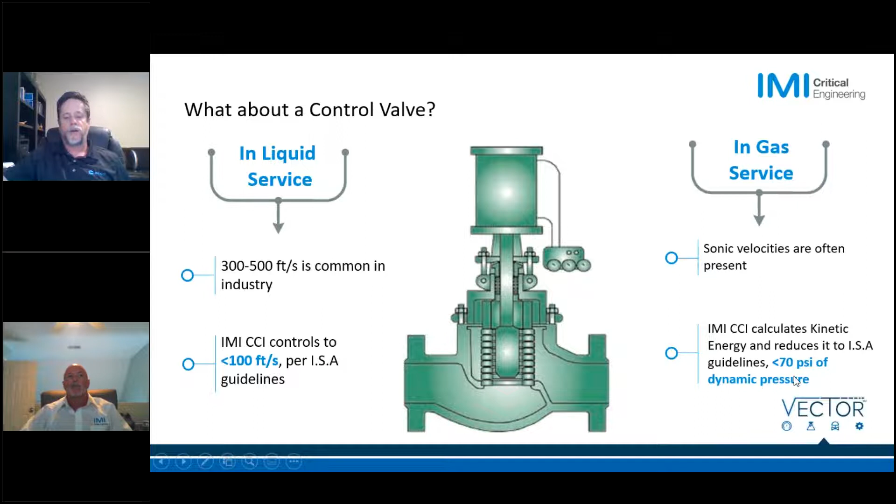So I already mentioned this, but the velocity created in the valve is a function of the pressure drop. You've got high potential energy on the inlet and higher kinetic energy on the outlet. So as that energy is transformed from potential to kinetic energy, you have an increase in velocity.

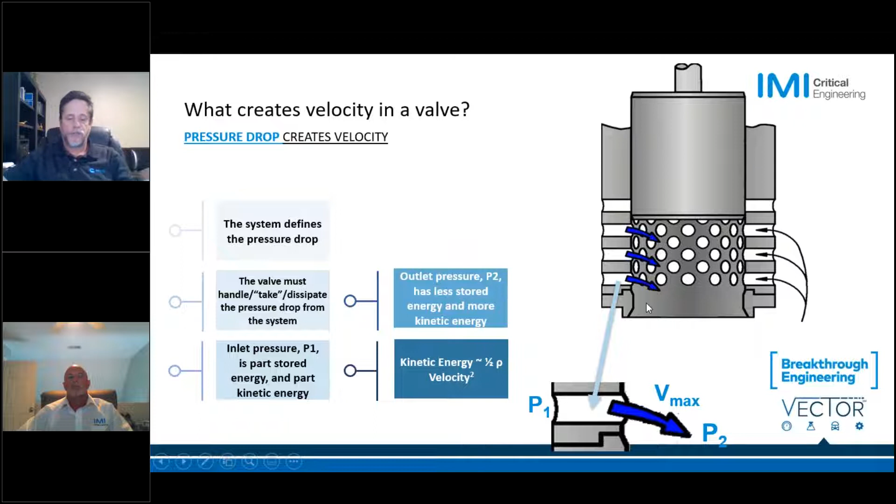Similar to that waterfall I showed, one of the IMI CCI designs in our drag valve is to send the fluid through a tortuous path with right angle turns. By doing this, P1 here, P2 here, same pressure drop, but I'm slowing that fluid down. I'm controlling the energy as it's going through.

Where in a single stage drilled hole cage on this side, I am not doing that. So yeah, the valve can still handle the pressure drop, but most likely it won't handle the velocity if it's a single stage control to the level that it needs to be controlled.

Okay. So CCI drag, it's been around for 50 years. We have other similar technologies, but drag is what you'll hear a lot when we talk about severe service. And basically, you take that tortuous path and put in a certain number of turns.

There's different manufacturing methods to stack these turns together. In this instance, it's a brazed disc. That becomes your control element in the valve. And as the plug moves up and down in the valve, it opens up these tortuous path channels to fluid flow to control the energy and the velocity in that fluid as it exits the valve.

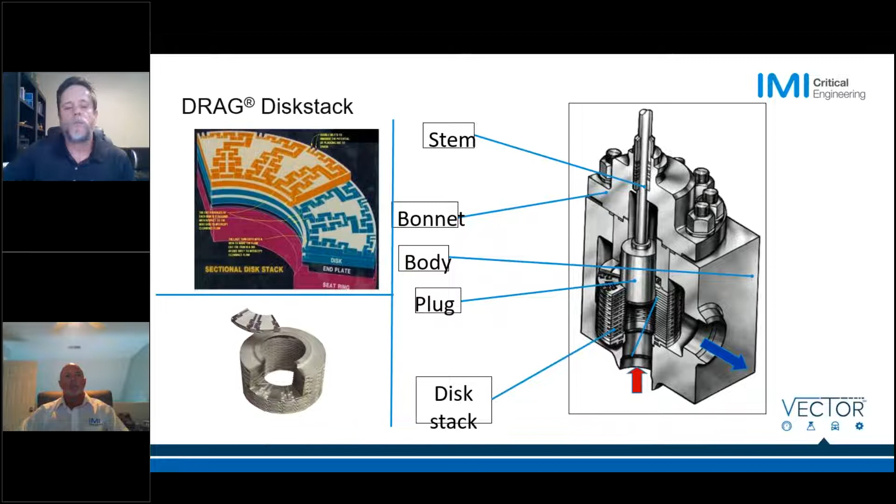Awesome, thank you. Okay.

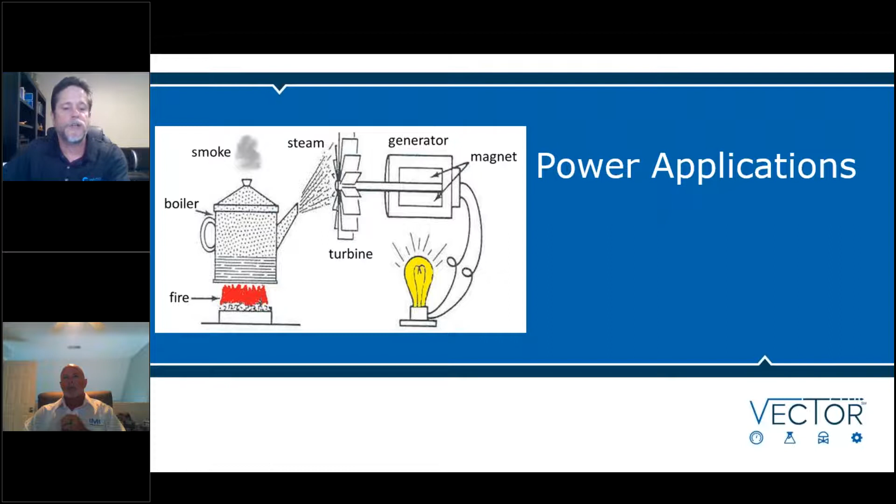So this is my super cartoonish power plant here. I've got nicer slides, but for those who haven't worked in or been to a power plant, I like showing this because it doesn't matter if it's coal or natural gas. The point is you're burning something to make steam, to spin a turbine, to spin a generator, to make electricity. If this was a combined cycle plant, you'd have the gas turbine on the front making electricity too. I'll show that in a second. I'm showing this because today's focus was power applications, and I'll give a high level review of some of these applications to build the base for future trainings.

So how much time do I have, by the way? 8:50 Central Time. Oh, okay, we're in good shape then. So 9:50, I'm sorry. You got 30 more minutes. Don't rush too much, leave time for questions. So for us in our group, IMI CCI, IMI Critical Engineering... I'm sorry, they're telling me you got 15 minutes. Oh, 15, okay, I think we'll still be fine.

We excel in high temperature, high pressure steam and water applications. We've mentioned this already, but combined cycle, supercrits, combined heat and power, everything. So when I say high temperature, high pressure, that's relative. It doesn't mean we don't do what someone might call low pressure. What it means is we're not the general service valves, where you see hundreds or maybe thousands of them in the plant.

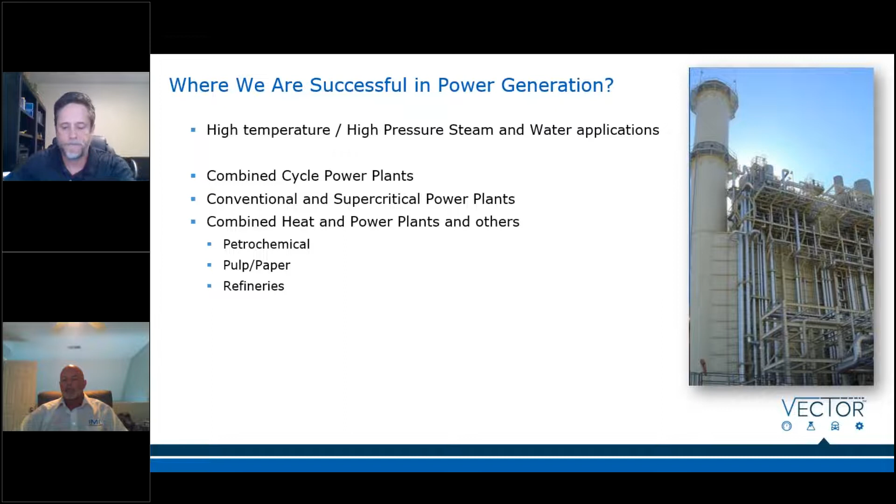CCI has valves in almost all of the steam and water control points in this plant. Main ones are feed water control and pump recirc control, and also the attemperator systems and the turbine bypass systems ahead of the steam. Turbine bypass systems are some of the more complex, and I'm going to mention those in a second.

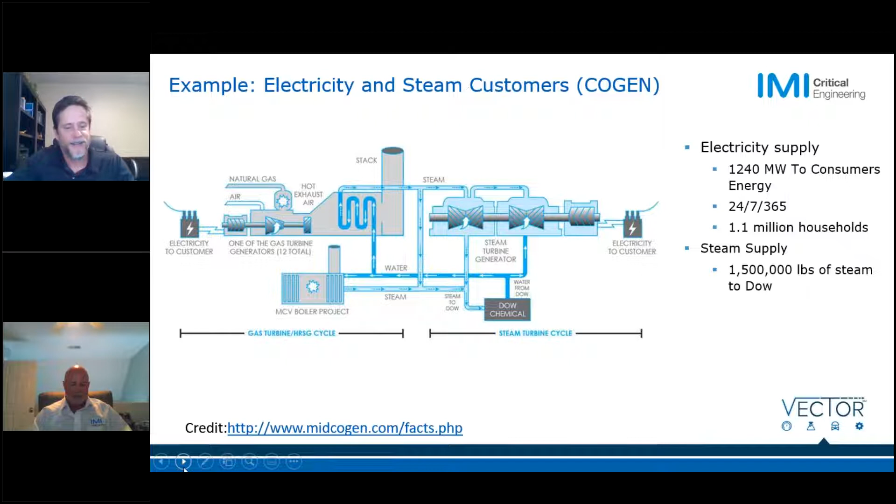So real quick on turbine bypass, we've been doing this a long time. Dan mentioned drag—CCI was started in 1961, but we've got divisions that have been doing steam conditioning in the pulp and paper industry since 1923. Dan's got a long history with that particular division, BTG, which you'll hear. He doesn't have that long of a history, but we've taken the steam conditioning expertise we've had since the early 20s.

In the last 20, 25 years, we've done a lot of turbine bypass. This is a little bit old slide, only updated to 2016, but since 2000, commissioned plants, new construction, we've won 33. I'll say everybody else has won 9. So we have a huge market when it comes to new construction wins.

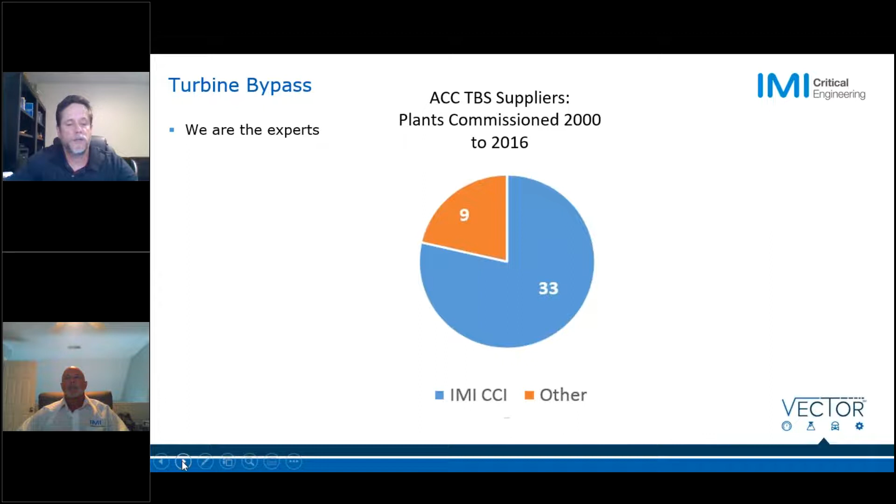Real quick, what's turbine bypass? Basically steam that bypasses the HRSG or bypasses the turbine. When you fire up a gas turbine, it runs quick and hot. If the plant has been shut down, as one example, the steam turbine can't take that hot temperature—it takes time to ramp everything up. Think about a steam turbine: it has very thick casing but very thin titanium blades. If you were to just dump super hot steam into that turbine too quickly, it's going to cause major problems.

So one of the things you do during a plant startup is, instead of sending the steam out of the boiler or HRSG into the turbine, you bypass it back into the system. It goes through what's called reheat, back into the system, and may even go to another bypass into what's called the bypass to condenser. This is just one setup—there are several varieties. But the reason it's called bypass is you're bypassing the turbine, either during startup, or because there's a plant trip and they can't send steam to the turbine since it's shut down, so they have to dump all the steam somewhere else. Not easy to do.

These are large valves. I'll use the hot reheat as an example—this could be an 18-inch diameter plug weighing 500 to 600 pounds. It has to open in 2 seconds with basically no deadband or hysteresis, and stop, and it can't bind, obviously. So you're putting together 5 or 6 different materials in a valve body that has to take a lot of thermal shock.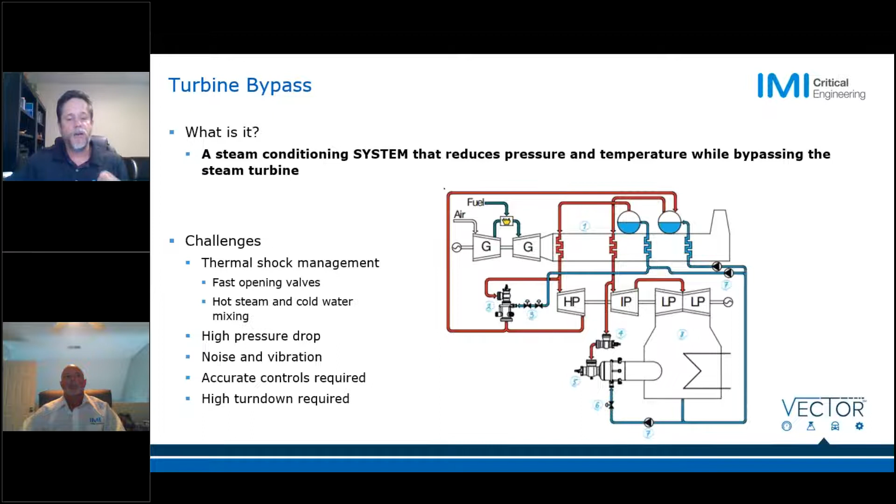The other thing happening at the same time—I'll show the next slide while I talk about it—is you're injecting water into that valve. On a hot reheat system, you might have 1,000-degree steam sitting here. The valve gets told to open in less than 2 seconds, and now you're injecting 300-degree F water into it. So what could go wrong, right? There's a lot of thermal management involved. You can see how big one of these valves is here—this is our shop in California with one of our senior techs, Jimmy Kent, standing next to it.

That's the valve without the actuator on it. The actuator is another 6 feet tall. So it's a very large piece of equipment that has to have very fine accuracy and control. So thermal management is a big deal.

High pressure drop, 2,000 PSI steam. I mentioned earlier about gas and steam service, noise and vibration. When you expand a gas, the pressure drops, the velocity increases, there are changes in density, and it creates noise. So at every point in this flow path of a turbine bypass system, we have to analyze the noise that's being generated and make sure we're meeting the noise requirements at whatever point we've agreed to downstream.

And I just mentioned it, it's a system with steam and water all at the same time. Besides in an attemperator, it's really the only place in a plant where you mix steam and water in a high pressure piping system.

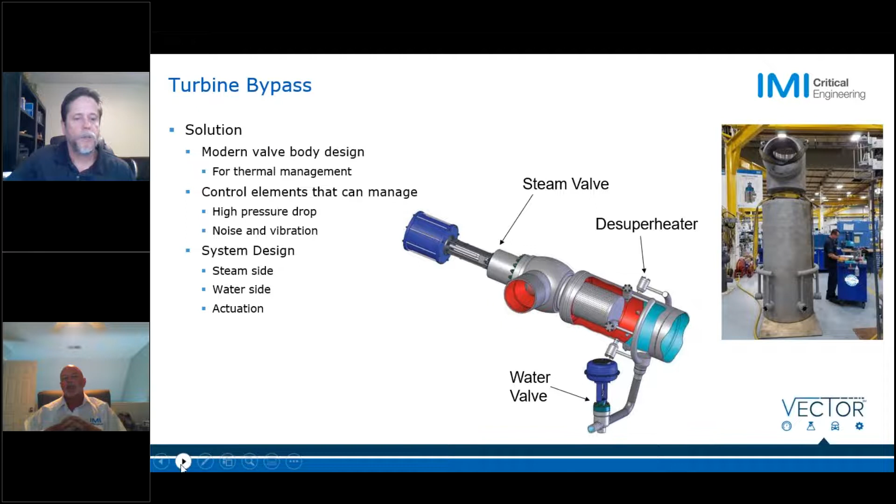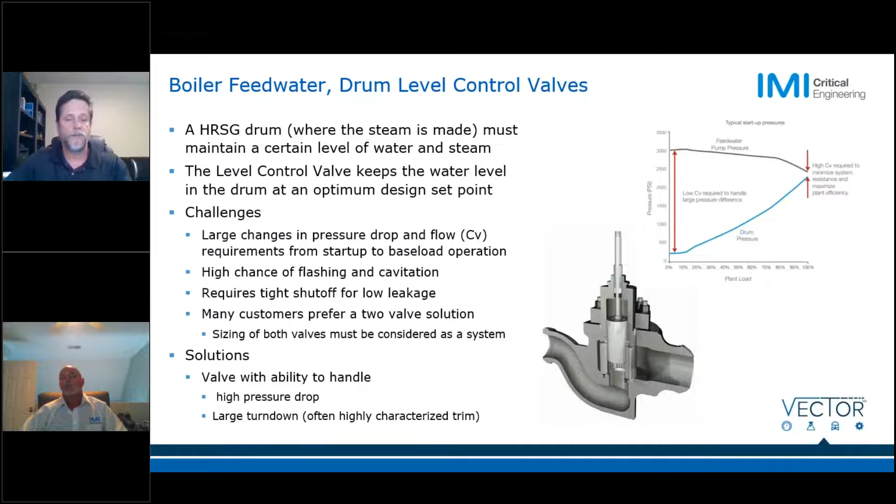Sometimes you need 2 valves to do it. Often you can do it with 1, but it's a very critical valve that we supply quite a few of.

The other one is the recirc valve. These valves are protecting a very expensive piece of equipment in the plants, which is your pumps. Basically these valves supply a minimum of water back to the pump, so you don't cavitate and have issues on the suction side. They have to do a lot of things like control a very high pressure drop, usually the highest pressure drops in the plant. I mentioned one earlier that we're looking at that has a 6,000 PSI requirement. It also might require MSSP or very tight shutoff, and a high chance of flashing and cavitation. So these are very severe service valves. This is another one of our important products.

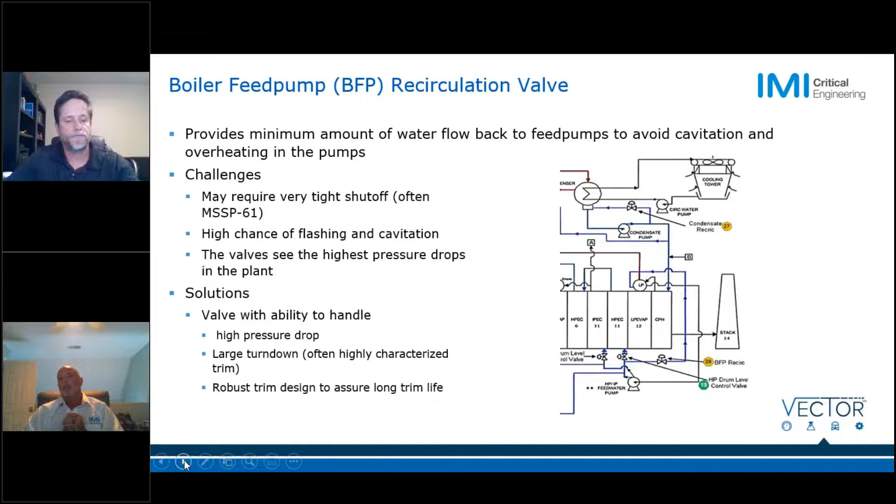I'll say one last thing. What we're doing now, and I think this will become its own training module, is retrofit. We've been retrofitting valves since the mid-70s. Now we have a new business unit to start doing it more aggressively, because we're using more additive manufacturing. We can cut lead times down significantly, so instead of an 18-week lead time for a trim, we can do maybe a 4-week lead time. There's not as much process requirements for documentation and engineering drawings when you do 3D printing. You can send a 3D model directly to the printer and they can make the part. So for many reasons, a lot of time is taken out of the manufacturing method.

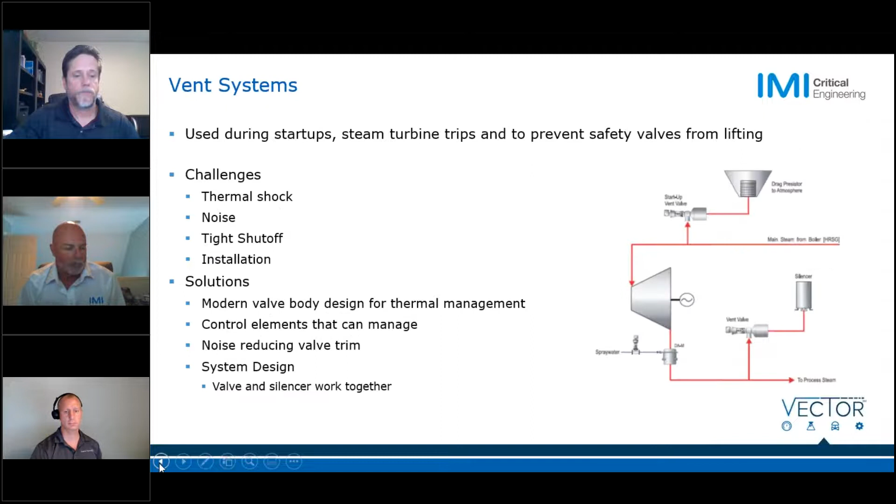The first one and the second one were compliments, they actually weren't questions. They thought you did a nice job, and said we'll buy you a beer next time we see you. Yeah, if we ever get to travel again.

Hey, I want to make a comment about that, I don't know if I mentioned it. Normally in non-COVID times, another part of my job is I would be out if you need support at a site. I would be the person out there with you doing the walk down, me or my boss or a few other guys. So once things get normal again, that's probably something Dan will talk about a little bit more. But part of the service is to be out there to help you ask the right questions and look at these valve problems.

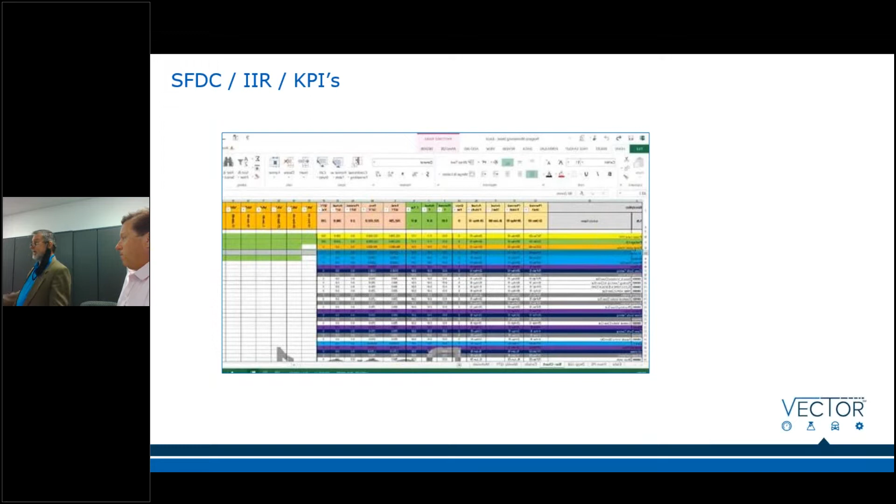So they had to divest, and that company got completely obliterated. But they came back and they are strong. They have a huge book of business that's coming to us—a lot of you are looking at an additional $500,000 to $1 million coming to you between now and the end of the year. It's not going to happen tomorrow, but this is a big deal for us.

Keep it down, the announcements are coming. But I'm telling you, when you drive into a plant, if you say CCI or Thermo, both of those are highly recognized. It's like if you went to a European chemical company and said Endress and Hauser—they'd say, oh, I know Endress and Hauser, it's the only place. They should be the number 2 line in Vector next year. We have failed miserably if they're not number 2 by a stretch.

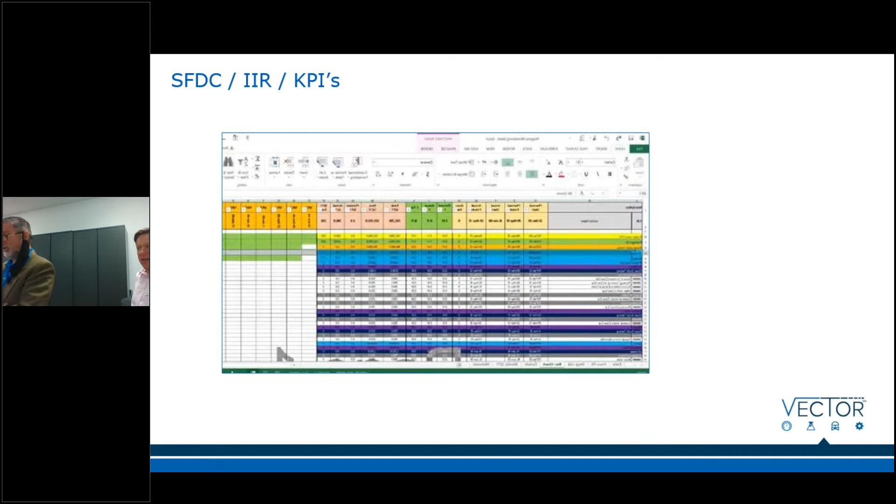The only negative in all of this is, guys, this is going to be a journey. We're not going to go tomorrow and get $10 million in orders in power and energy. They don't know you, they've never heard of Vector. Even though they've heard of IMI, CCI, and Thermo, it's still going to take a while.

Remember, if you sell one of those $280,000 valves tomorrow, you get a commission. When is the PO coming? Well, the PO might come before that. When is the valve coming? 40 weeks, and you get paid like 20 weeks after that.

So yeah, go ahead. Caleb has a question for Larry: Power Specialties here in Kansas also shows SICK on their line card. I thought we were the only rep for their ultrasonic flow and gas analytical.

There's a longer story to that. They are broken into divisions, even with their ultrasonic flow meters. So Caleb, that's a one-off, I'll call you specifically because that's in a specific area. I'm sure you can get IMI questions. There's going to be a lot more information next week on IMI stuff.

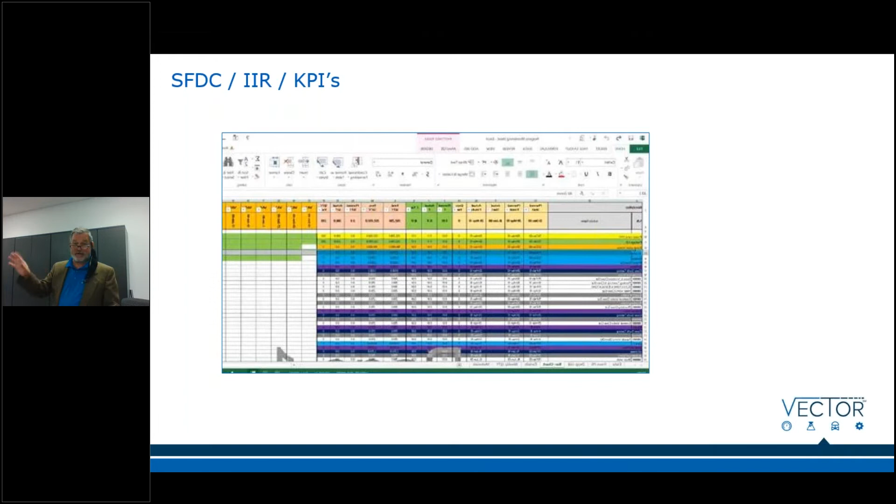If you're going in and the guy wants to talk to you about mag meters, you bring a mag meter brochure. And if he says, while I'm there, I want to talk to you about compressed air, you bring a Sullair brochure. It's not saying we never will do a separate power line card, but right now, no. We went agnostic for a reason, we should know what our lines are.

That general brochure, if you look at it, it's agnostic and talks about solutions and applications we can solve. Because if you say 'hey, we got blue ones' and the customer likes red ones, maybe you never get the call. We intentionally did that.

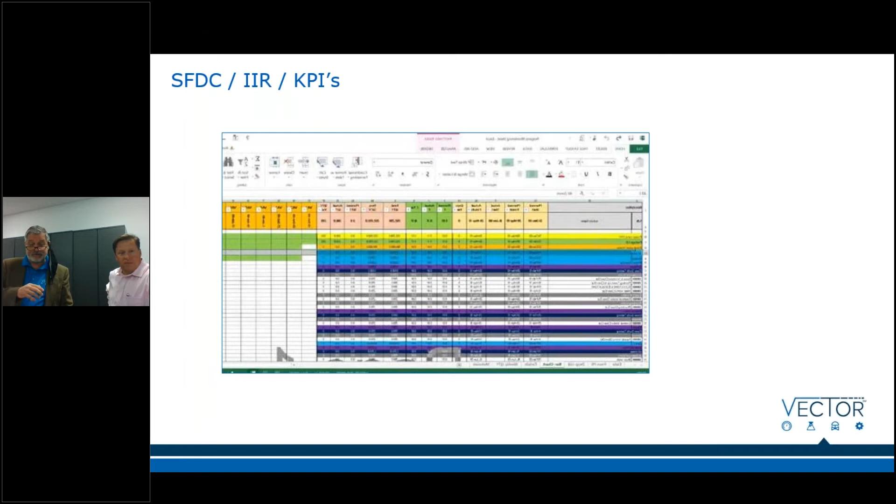Anything else, Nikki? We have solutions everywhere. One question that came up was, hey, do we have SICK in this area or that area for the analyzer side of things? The answer is, remember, you have solutions anywhere you go. If it's a SICK analyzer in a shelter, it's us. If it's a SICK analyzer with a sample system, it's us. If we can bring it into Vector as a solution, you have every product we have on the analytics side everywhere. Does that make sense?

One last question, regarding IMI, CCI, do the end users know them as IMI or CCI? Could be either way. I still think CCI is going to have the most legacy name out there in the industry, but that's why I'm saying know both. That's going to be legacy, but they're doing a pretty good job of rebranding everything with IMI in front of it. So if you're checking AMLs, look for both, because sometimes you might find a different IMI brand on the AML, and if Truflo's already there, it's easy to slide CCI in behind it, or vice versa.

And Truflo is a good name too. Truflo is a big name. Just CCI.

15 years ago. They've been back, selling factory direct. CCI as a name still, right? Absolutely. When I look at it, they do the same thing for Raychem. A lot of times, exactly, Raychem is the one. Yeah, you don't let that name die. They keep it alive in Raychem.

There'll be a lot of training coming out on that, and a lot of information to support it. We know where they have install base, and we know where they have open opportunities that are going to be rolling over to us. Starting next week, you'll start seeing a lot of information.

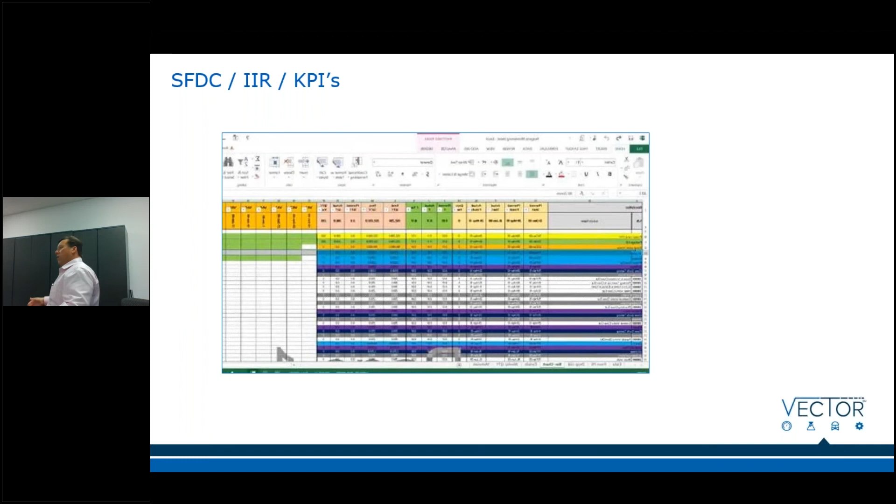Most of the corporate folks are out on the West Coast. They've got people in Atlanta. Dan works out of his house on the East Coast, but there's a massive facility up here on the north side of town, just short of the airport. I don't know, Larry, that place is 100,000 square feet plus. The big seven-foot-tall valves they're working on, they bring them in there and remanufacture, work on, and service them. They've got big trailers of equipment. When we're looking at these power outages, they'll bring a trailer out to a field somewhere with drill presses and repair equipment.

There's a lot going on, and what's good and bad is we're rolling out two major initiatives at once: power and the IMI partnership, but they kind of control the power market, so that does help us since those two things line up. They have five tractor trailers they'll pull into a plant to do a turn, and they're talking about adding to that fleet. So it's awesome for us, right? We're getting into the valve business without having to have a valve shop.

Yeah, all right. Any other power questions? Go get a power PO today. Power starts with PO, he just thought that out. He is so happy.

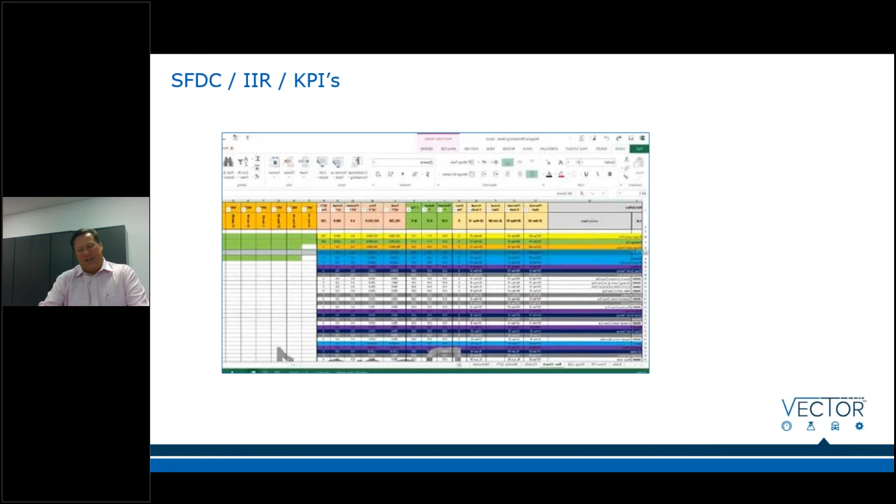So they're not on Valero's email. Are you sure? I had it right now. Jared has already had some conversations with some of his buddies over there.